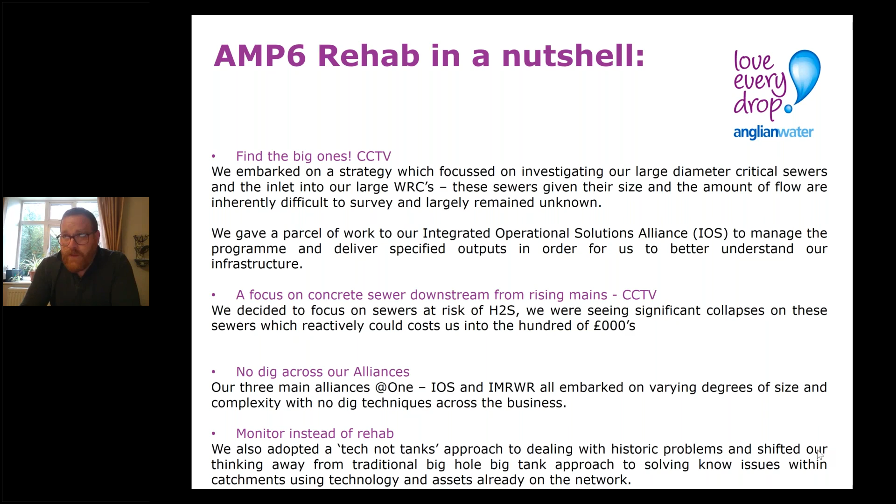The success of that program, the trunk sewer program, was really borne out when we got the first one that said, okay, we found a problem. The problem was found on our largest trunk sewer that goes into Whitlingham WRC, the treatment centre for all of Norwich. So it's the biggest one we have. This sewer happens to be 12 metres deep, about 1.7 metres in diameter, an old brick sewer.

This is what we found, and I think it might take a while to jump on, but this is it: where those bricks should be, they no longer were, and that's a real problem.

I've called this one very deliberately 'avoiding a disaster,' because that's ultimately what this was. Had this inlet sewer collapsed, it would have been catastrophic, both in terms of environmental impact and the impact on almost every aspect of PR or finance or anything you can think of that you wouldn't want thrown at you in the water industry. This is one of those sewers where you just don't want anything to ever happen, and there are obviously those across the region and across the country.

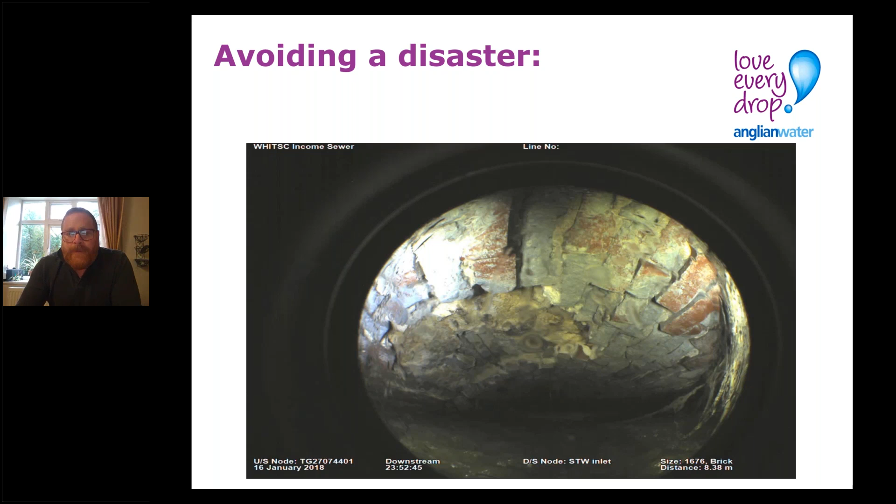I'll come on to how we got this photograph, but essentially this is what it looked like when we'd stopped the flows going through. You can see that the top half, or the crown of that pipe, is just earth essentially. There are a few bricks in there, but that could have collapsed at any point in time. So to get us to a place where we could actually do that, we had to come up with something really innovative.

We engaged with our supply chain and came up with an over-pumping solution, which at peak had to pump 2,000 litres of sewage a second. I was told this was the largest over-pumping of sewage in Europe at the time, and there's no doubt there are people on the calls who'd say 'I doubt it, because we were doing something better' - but that was the story I was sold anyway.

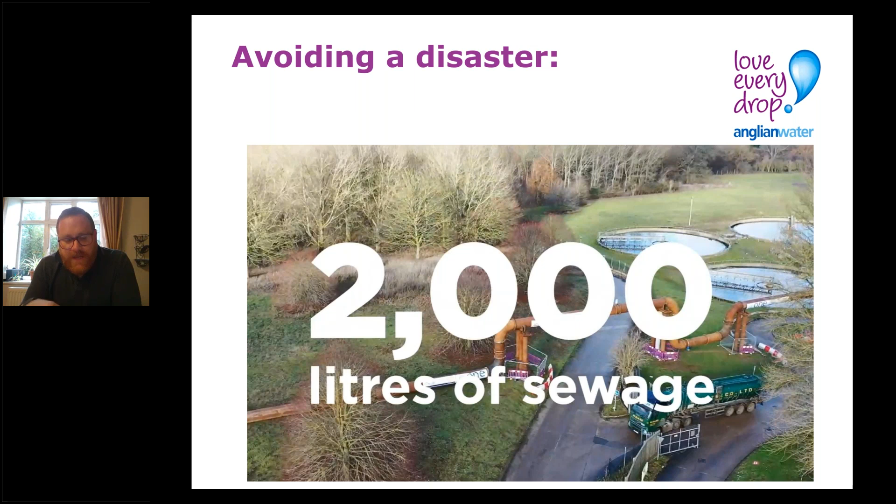So the work and the thought and everything that goes into getting something like this up and running was utterly phenomenal. Essentially we removed all of the flow from that system, and here's another example of what that looked like. It was just a real sight to behold, something which we've never done of that scale before.

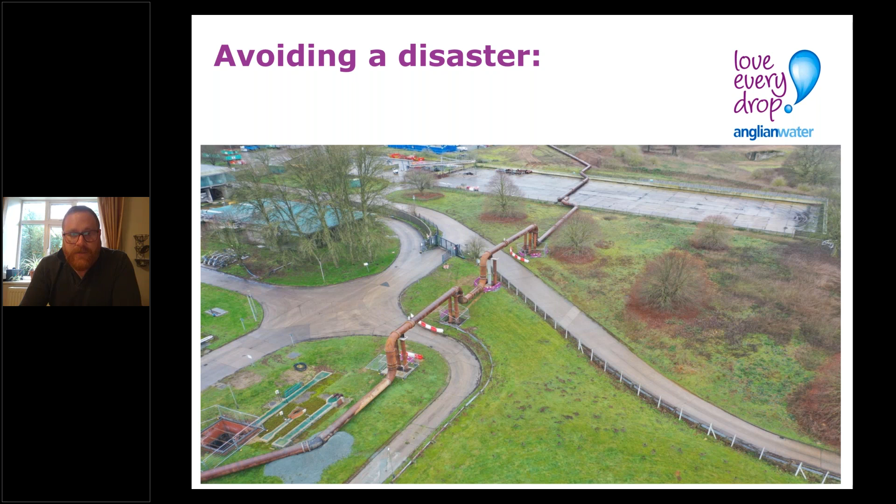Hopefully this is ticking round for you, but I don't want to labour on the point. If there's any questions or anybody wants any information on who did what here or how we did it, I'm happy to pick them up in the questions or later on, but I shall move on.

The technique we used to replace this was obviously, you know, the cost of digging down 12 meters and relaying this was just a no-brainer. So we spent an awful lot of time coming up with a solution, and this was it. Without going into detail again, this was the solution which we came up with to avoid the dig down and replacement of a massive sewer.

I'll come on to what it looks like now. This is a photograph of when they'd finished the work, and given where we'd started with the first picture, this was just utopia for me, going from ensuring that the resilience of that network is now in place for what I've been told is and should be 100 years. That's a really good feeling, because I now know that the rest of that system is relatively intact and is actually going to continue to serve Norwich as it should.

And now the piece that was wrong, we didn't wait for that to collapse. We avoided that disaster, and it cost an awful lot of money to do this, but it is, for me, the best project I've ever been involved with - something where you can say you took it from the concept of going to find out if something was wrong to actually resolving that issue. It was a great journey, and one which we've carried on with.

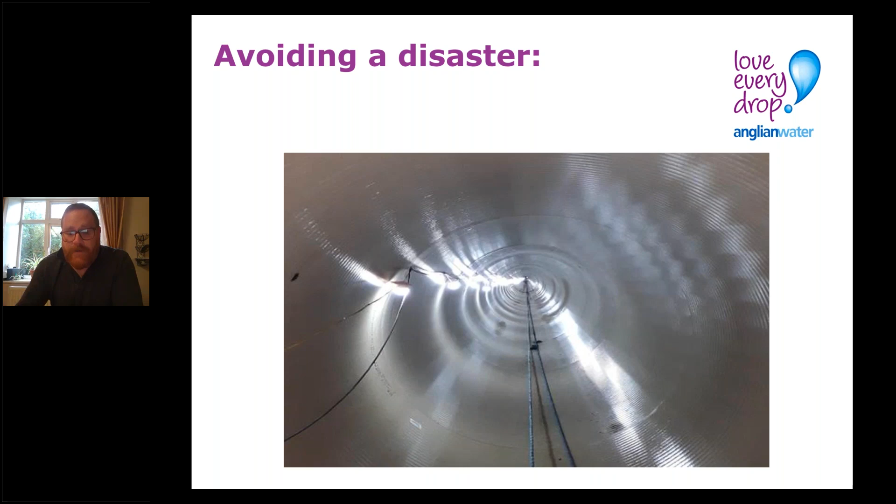So just to stick to the brief agenda that I've got, it was something around the COVID response. If I was to think about our COVID response purely in terms of sewer rehab, it would almost be - and I'll probably get told off for saying this - it sort of happened at the right time, purely because we'd finished the work for AMP6 and we were in the planning phase for year one.

So the one scheme which we have on site and going, I'll come on to in a sec. From a purely sewer rehab perspective, the impact from COVID wasn't quite as painful as it was felt in other parts of the country or other parts of the business or other areas.

Having said that, rather than focusing on the negative, because obviously you've all got your own eyes and you're all experiencing this yourself, I probably wouldn't be doing this seminar today. I'd probably be walking around no dig in Peterborough with all of you, and it wouldn't have given the platform that we have like we have now.

And you know, if you think about carbon footprint and all of that stuff, the travel has all been avoided. I don't know where you're all sitting, but I'm guessing that some of you, like me, will be either in your kitchens or in your lounges, and the whole ability for us now to communicate and work in a different way really does open up opportunities.

That's something which I'm really keen to talk about, because I have a real passion for taking what we do wider - both in terms of what Anglian does out to the rest of the industry, in terms of the sewer rehab network groups and the innovation labs, but also bringing the brilliant stuff that some of you guys are doing and offering it back into Anglian. Because for me, there's been almost a legacy in the water industry up until a point, within the last few years, of 'we can do this ourselves, we're really, really good' - and I completely agree with that. All of the companies that I've worked with are really, really good, but actually we cannot do it on our own, and that for me is one of the most important things that we all do.

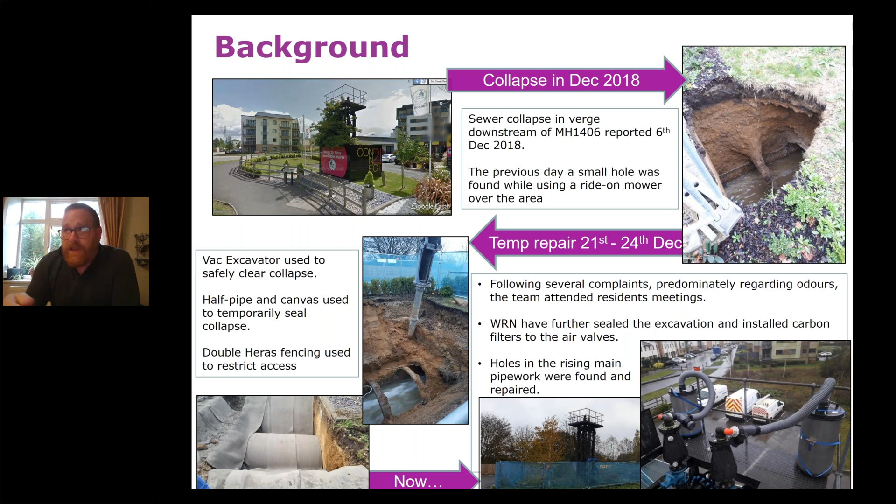It was in such a poor state that we had to do a temporary repair while we worked out a solution. Whilst this was going on, we were still in the throes of doing the Whitlingham scheme, which gave us traction to start pushing this stuff wider and really getting involved with sewer rehab work we'd not really done before, spending money we'd not really had to spend before because the assets had been fine. But as with all of this, they come to the end of their life, and it was an eye-opener. So if you think about what happened at Whitlingham, the finding of it, then the warning shot here and where we're going with this - it's a great story to play out, which is why I wanted to do this today.

In terms of the strategy for Peterborough as a whole, we can't afford to do everything. As all of you will be aware, you have a finite amount of money and resource, and you have to spread that across the region and mitigate those risks and do what you can. Something we found not surprising was there was a significant amount of H2S attack in the network.

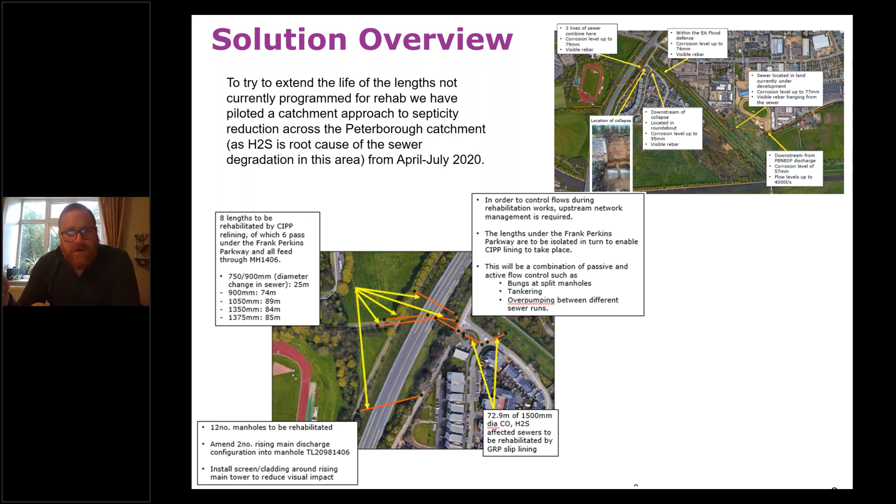I'm conscious I'm really running out of time. This talks about where we would need to put some of the over-pumping and how we would possibly manage to do that. It was a real challenge, and one that @ONE, our largest alliance partner, have completely blown us away with the solution they've done. Whitlingham was a really tough job, but thankfully for us it was on our land in the middle of a field. This one is in the middle of a city centre.

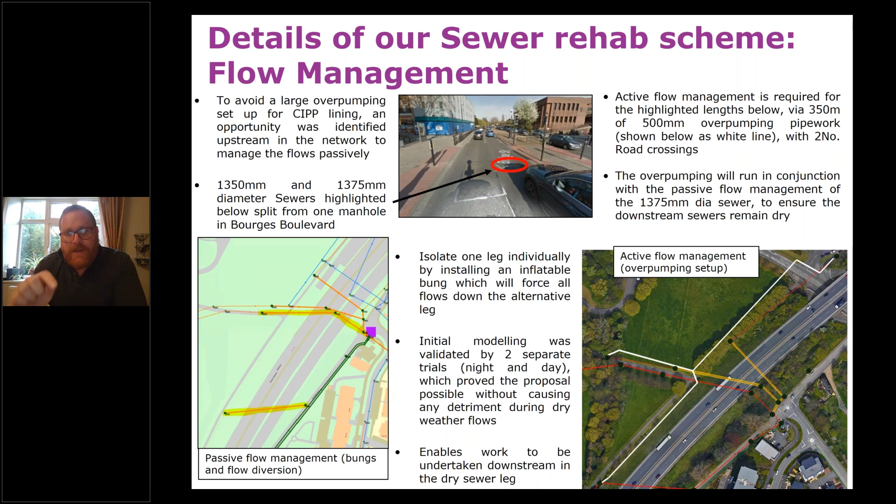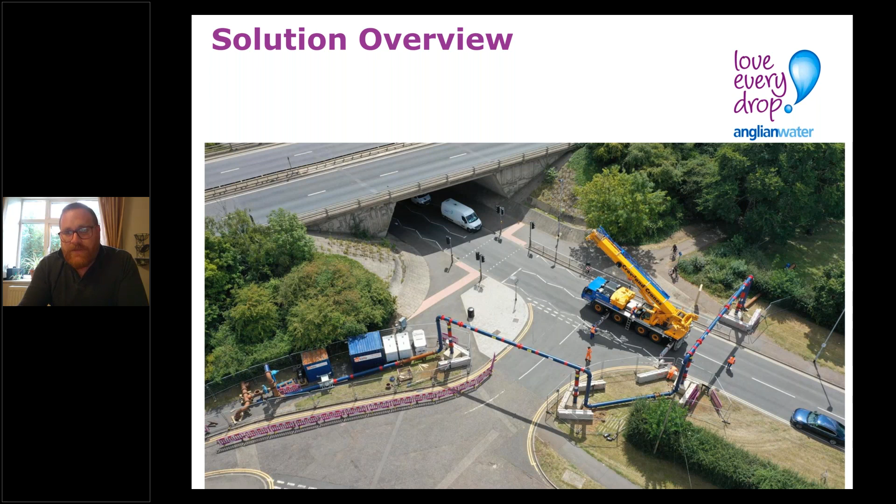So the over pumping which you saw at Whitlingham, we engaged with the same supply chain, and they've done it. This is probably what you would have seen on your way in this morning to No Dig Live, where we are doing this live over pumping in a town centre, and at this scale. We've done it at Broadhome, and now here, and it's revolutionary for us. I don't know whether some people are already doing this stuff, but for us it was like, wow, we can really do this. This drone footage gives everybody a completely different perspective of just how magnificent some of this stuff is. We're working live here, with live flows on some of these sections, and for us it's groundbreaking and a complete game changer.

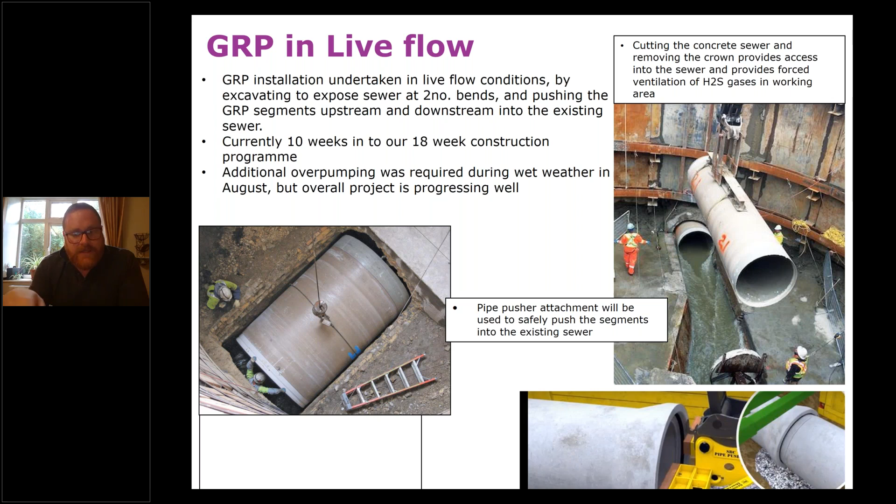As much as we've got this now nailed, and I'll probably get told off for saying that, because we probably haven't, but we're 95% there I would say. We need more of this type of innovation and no dig solution across the whole network.

So that leads me on to these innovative solutions. I've got 1 minute, I need to be really quick. So this is Rob, take a moment. You can have a couple more minutes.

Thank you. So the innovative idea, we came up with a rain garden idea, which I think was actually originally developed in Welsh Water. My memory is a bit hazy with this, but it was about trying to do things differently, keeping the surface water here rather than pumping it through a network. That comes from having those different conversations, the networks of people, the Water Innovation Network, and the collaboration.

Finally, this is our proposed scheme, alongside maintaining some of the stuff we did in AMP6. It's now about the AMP7 scheme. We have to live within our final determination, which, as you're all aware, we've taken to the CMA. So without labouring that point, we still have to focus on those sewers that are of critical importance to us. For this AMP, we're focusing on road, rail and rivers - all of those sewers that flow under, some of which we're aware of and some we haven't been. That's the focus.

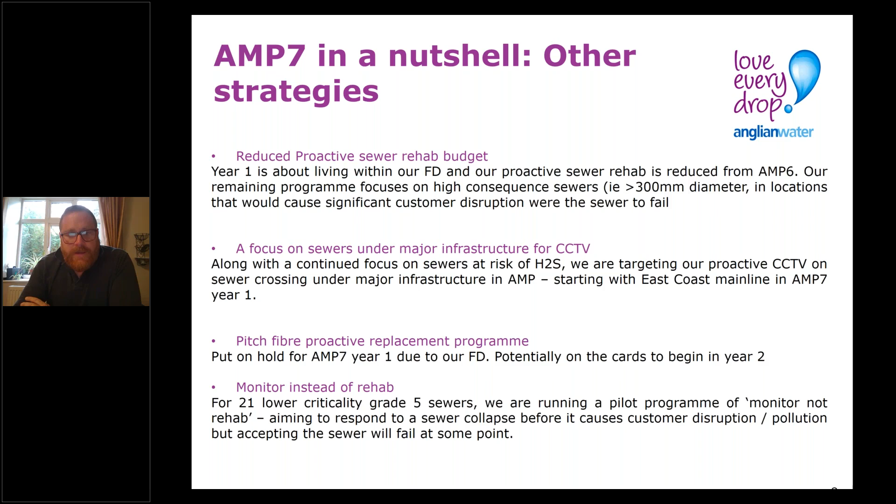There's a further CCTV campaign around H2S, there's a pitch fibre proactive programme, and there's the monitor instead of rehab approach, which, like I said about Peterborough Potter's Way, we can't afford to do everything, but we can afford to monitor everything that we feel is at risk. So rather than waiting for somebody to tell us something's gone wrong, we are being told. That's a huge leap forward for us in terms of being aware of our network and having a smart network. With 21 minutes gone, that takes me on to any questions.

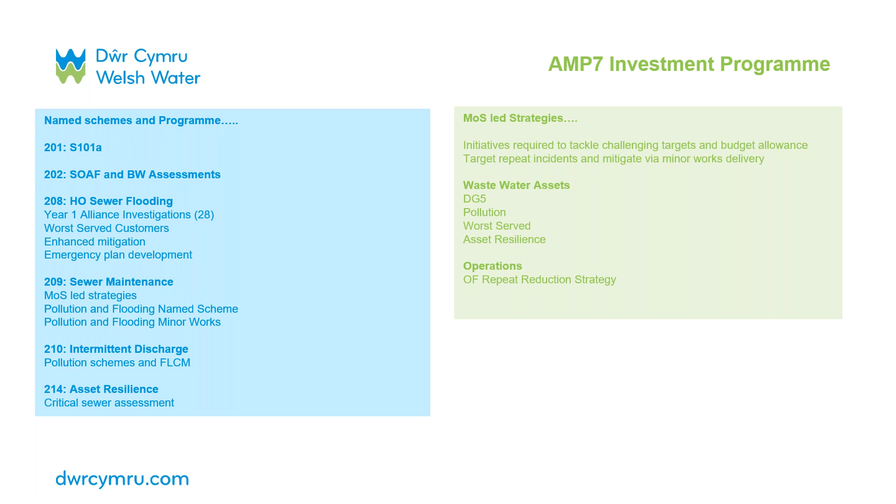The purpose behind the MOS-led strategies is to tackle challenging targets and budget allowance, target repeat incidents, and mitigate via minor works delivery. This covers MOSs such as DG5, internal flooding, pollution, worst served customers, and asset resilience.

A key focus area is around efficient delivery to ensure that the right people and expertise are available to get the best value for money. This has been split into four areas: wastewater assets, the Alliance, our engineering delivery team, and operations.

With wastewater assets, we're looking to increase our function for minor works delivery, focusing on low value schemes but delivering high outputs, and ensuring a thorough and definitive root cause analysis prior to scheme feasibility release. We'll also look to utilize innovative technologies to confirm RCA, including technologies such as electroscan.

Moving on to Alliance delivery, we're looking to batch schemes and investigations where possible for efficiency, promote collaboration and innovation, and there's a big focus on risk and value sessions to ensure the correct investment is progressed, along with discussions around the acceptable level of risk to take forward.

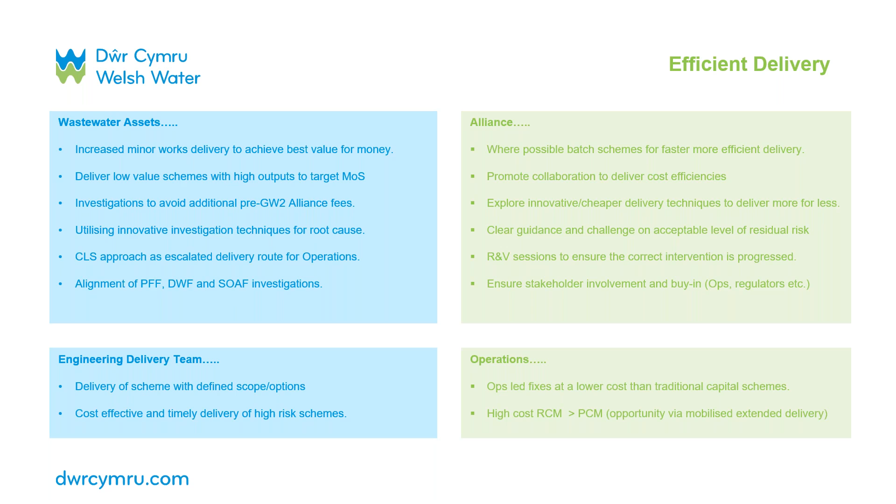In terms of the engineering delivery team, we look to utilize this team to deliver defined scopes of work, which are usually high priority, high risk schemes, moving into more of an ops-led type approach for fixes at lower cost compared to traditional schemes.

In terms of the AMP7 MOS strategies, these have been developed to target known problem areas proactively and look at low cost resolution, focusing mainly on flooding and pollution reduction through register reviews and repeat incidents, along with 12 monthly follow-on reviews where we assess and resolve any residual risk. We're also focusing on proactive tools, examples being the rising main triangle for burst prioritization and understanding of business risk, and heat maps for other cause flooding and pollution hotspots, which we can use to develop proactive survey programs.

We're also looking at worst served customers. This is a new measure covering customers at risk of repeat internal flooding within a 10-year period. Tasks for this include register reviews and audits to confirm customers at risk, and also removing them from the registers through minor work schemes to tackle OC issues. The aim here is to remove all worst served customers aligned to our 2050 vision.

And finally, looking at asset resilience, where we are identifying and surveying critical assets to inform of condition and future investment need.

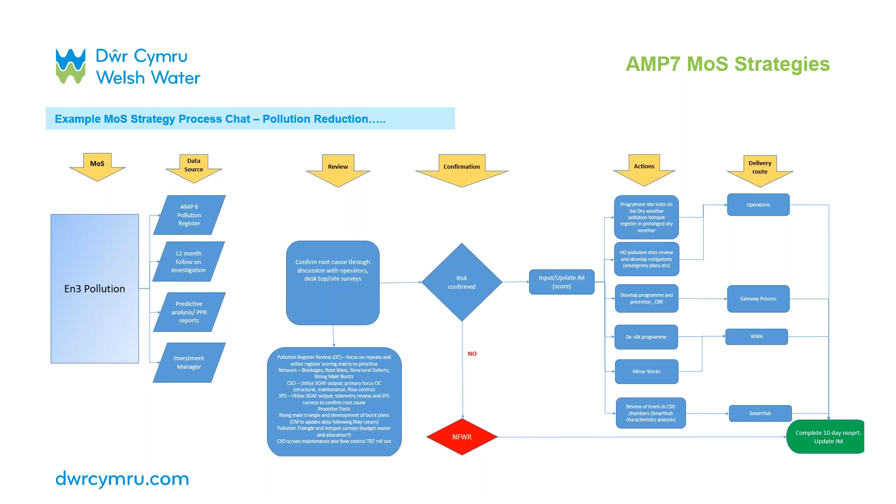The next slide gives a brief overview of one of our flow charts, which shows in this particular instance, relating to the pollution strategy. I appreciate this is quite small, but I'm sure you'll be able to look at it in more detail when the presentation has been circulated.

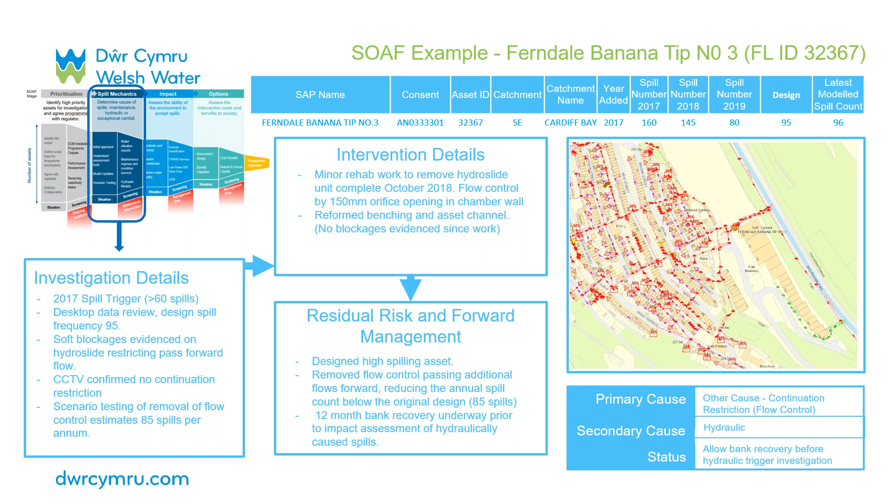This slide shows an example of a SOAF delivered scheme through wastewater assets, which involves site investigations, telemetry review, and scenario testing to inform the hydro slide removal. This had a very positive result, showing a reduction in spill frequency from 160 to 80 spills. This was a positive example showing that through in-house investigation and understanding, we can deliver positive results through minor works delivery, getting small value schemes to deliver high output results.

As mentioned previously, a focus is towards proactive investment and investigation. Evidence shows we need to be more proactive and use data to target low cost, high output investment. This includes trend analysis regarding root cause and targeting known repeat issues and OC problems.

This also feeds into the proactive initiatives mentioned earlier in the presentation to target areas of poor performance and proactively investigate to inform future investigation. Some examples here, mentioned previously, are other cause flooding heat maps, pollution triangles, and rising main burst triangle.

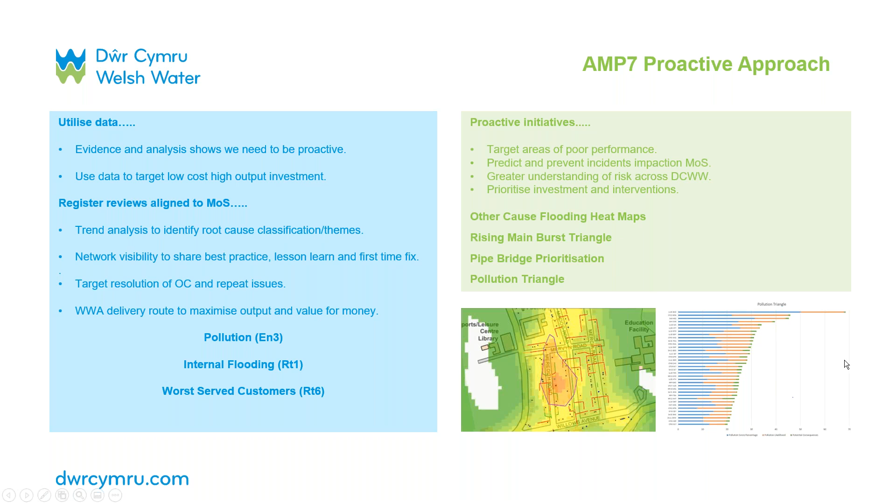In AMP7, we need to look to be more proactive and collaborate with all stakeholders to get best value for money and achieve our targets through this linked up approach. This includes improved visibility to ensure long-term buy-in and sustainable management of the SMNR type approaches.

Some examples of this have been rainscape initiatives, working with local authorities, and involvement in our flood alleviation schemes, which are joined up with local councils and the regulator.

Next slide is regarding risk management to inform in-AMP and future expenditure. It's very important to have that accurate risk position, supporting our RCA root cause analysis documentation, to inform both in-AMP and future spend. A big push is on definitive root cause prior to release of any scheme, ensuring we've got the correct root cause and are focusing on the right options to push forward.

We need to also utilize existing information, such as sustainable drainage plans and outputs from other initiatives like SOAF, to feed into these programs. We also need to push more on the delivery of minor works programs, so we get best value output to achieve our MOS for low value scheme delivery.

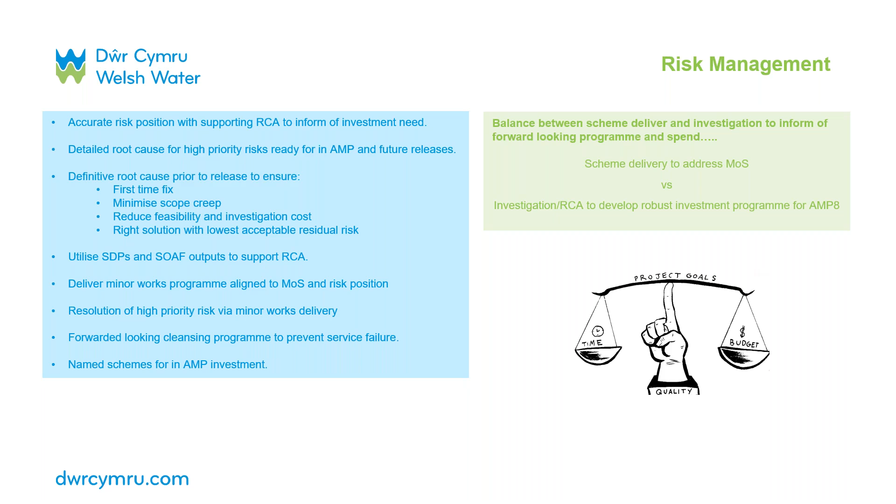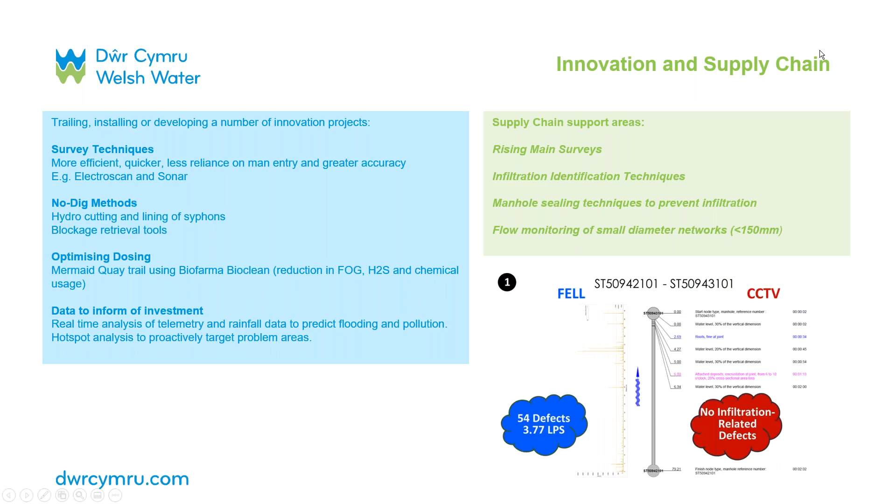Moving on to some of the challenges we're facing now and for the future, looking at PR24. Some of the challenges include changing customer expectations, changes due to urban creep, greater inflows into our networks, climate change, and an aging asset infrastructure.

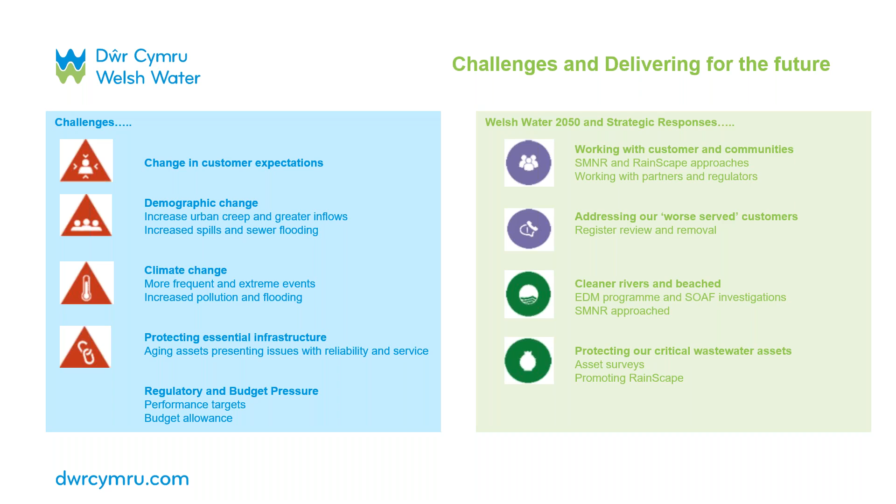What we try to do is align this to Welsh Water's 2050 strategy and strategic responses - working with our customers and communities, looking at SMNR type approaches and RainScape initiatives, working with our partners, addressing our worst served customers, cleaner rivers and beaches through our EDM program and SOAF investigations, and protecting our critical assets through surveys this AMP to determine structural condition and inform future investment and spend requirements.

So a quick summary in terms of preparing for PR24. Looking at lessons learned from previous AMPs, we need to provide more evidence to develop performance commitments and justify investment. Ensure our investment management system reflects catchment position accurately, and try to get ops buy-in and awareness early on with these name schemes.

To develop a robust AMP8 investment program, we want to engage with asset strategy early on to build a bottom-up investment program, provide name schemes with definitive root cause and option cost to inform investment requirements, to give a more accurate plan.

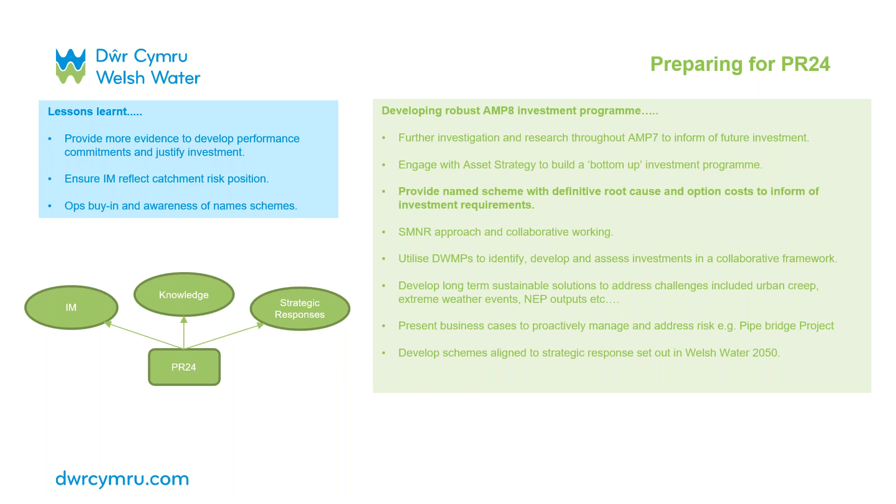Utilize existing data and also build on the findings from drainage and wastewater management plans, which will be ongoing throughout this AMP and will feed into the PR24 program. Also develop long-term sustainable solutions to address challenges such as increased urban creep, extreme weather events, etc. And continue to build on these journey plans, set out in our Welsh Water 2050 strategy.

Just to summarise, in terms of AMP7, the programme has been aligned to our 2050 vision and long-term aspirations, which leads into the development of our journey plans. It's a risk-based AMP7 programme.

Evidence analysis shows that we need to be more proactive, looking at proactive initiatives, MOS strategies to target low-cost, high-output investment, focusing on OC issues and repeats. We need to utilise minor works delivery and also wastewater assets teams and operational delivery for high output to meet our targets, but for low cost solutions.

In terms of relationships, build on the collaboration we have in previous AMPs in this AMP. Further engagement is required, building on the collaboration and those sustainable management type approaches.

Finally, looking at AMP8 and PR24, developing this catchment type approach, ensuring we have defined RCA and name schemes, and ensure we have engagement with all stakeholders, including asset strategy and our regulators early doors, to inform our PR24 program.

Thank you, and yeah, any questions I'll be happy to pick up and get back to you. Thank you.

So maybe to preface this, perhaps there's never been a greater need for the phrase risk management in the public sphere than right now, and perhaps there's never been a time where risk management has been more relevant to sewer rehab projects. It doesn't have to be a complicated thing. Just a constant awareness of what is going on in our organisations and the external influences that may affect our rehab projects or our organisation's business.

So risk management is arguably the most important thing. So maybe just skip back a slide and we'll look at just what we are doing on the island of Ireland at the moment. Embracing current scientific thinking, water utilities are tasked with delivering technical excellence in spite of increasing financial, social and environmental risks.

That much is clear and has been clear from presentations already. Irish Water are under the same pressure to use tighter capital resources to maintain a rather large sewerage asset base. So the challenge is we can't fix everything, but using risk-based principles, where do we do our sewer rehab, and where do we leave as is until funds become available at a later time?

So on screen, you can see, hopefully, just a couple of photographs of some of the rehab that has been undertaken across the island of Ireland.

And during 2020, unplanned, reactive, proactive, if you want to call it, rehab works have not ceased. But certainly this year, for most part of this year, has certainly provided space to focus efforts on asset planning activity - that activity which seeks to continually improve risk-based decision making.

How can we make decisions on potential rehab projects if the data is false or misleading? And that point is very important in all of this, because the more we know about our assets, the better decision making can be, and we can direct scarce and precious funding to the right projects.

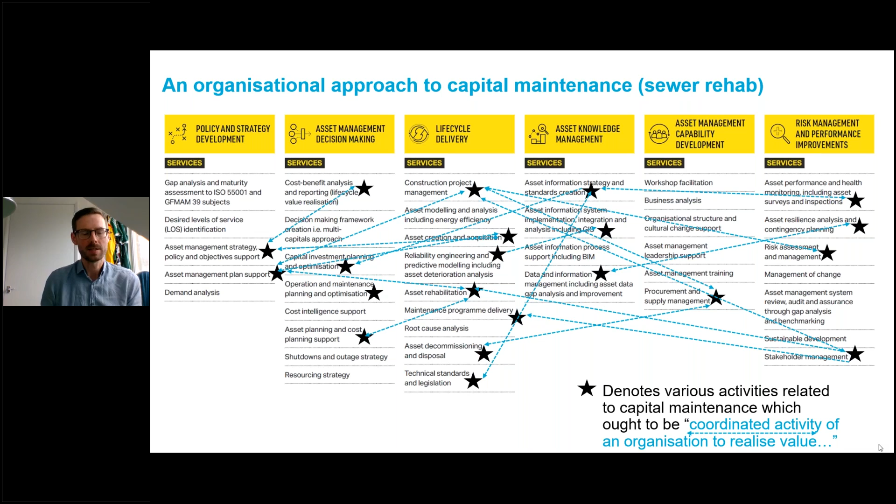So this diagram is entirely fictional, but it ties risks back to organisational value. You should see that every risk which we address within our sewer rehab programmes and projects should address an organisational risk. If it doesn't address an organisational risk, why do we do our sewer rehab programmes in the first place? So this is entirely fictional, as I've mentioned, but think about a risk register you know, or that you've come across in its myriad of forms.

If there is a risk of an operational asset failure, an organisation will initiate planned or unplanned maintenance programmes, and these will typically be delivered by an organisation's service providers as work orders to address that risk. So tie the risks back to the organisational objectives. Mentioning COVID-19, at the moment it has played havoc with many organisations' asset delivery targets.

Resilience analysis and contingency planning is something we have to consider in all of this, so that risk can be addressed in a way that suits the organisation's overall objectives. So as I mentioned at the start, maybe that means scaling back on asset delivery work and putting more emphasis, using the space and time created, to do more in the asset planning space.

Asset data gaps or inaccuracies can lead to poor decision making. As a sewer rehab team we collect thousands, tens of thousands, maybe hundreds of thousands of pieces of data that update an organisation's Irish Water systems, and we have to get good quality data in there to make good quality decisions. So the minutiae of detail is very important to the overall organisation's objectives, and it's important for us to remember that.

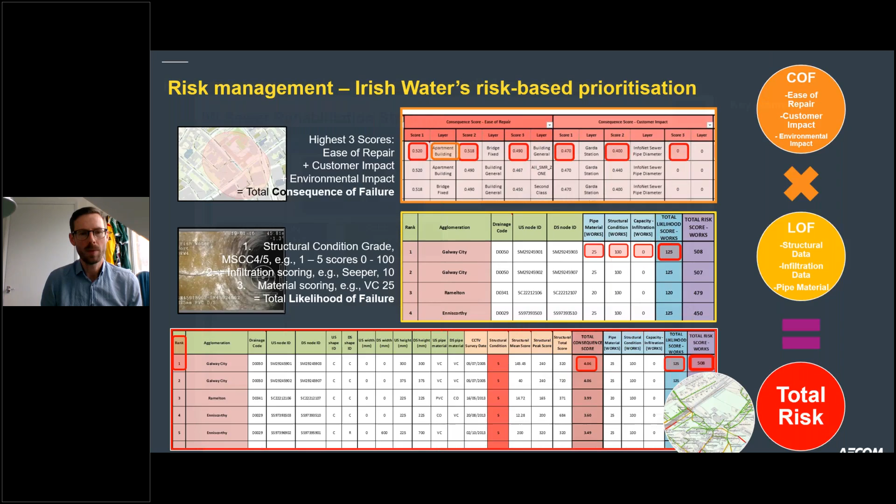Moving on, just to mention our proactive workflow strategy. When we talk about risk, maybe it's fair to say that we, the people working on sewer rehab projects, are human after all. We're not perfect, but we perhaps present the most inherent risk if we don't follow well-established procedures. So it's important to agree a workflow strategy that works for all stakeholders - again, there's no perfect solution.

Irish Water's rehab strategy has a well-established process of gathering data from legacy local authorities, inspection planning by asset planning, followed by condition assessment by asset delivery, often undertaken by external contractors. Following that condition assessment, data is fed into the prioritization tool and a selection process is used to determine rehab works. Budget considerations are made using the sewer rehab assessment tool, followed by detailed design and delivery.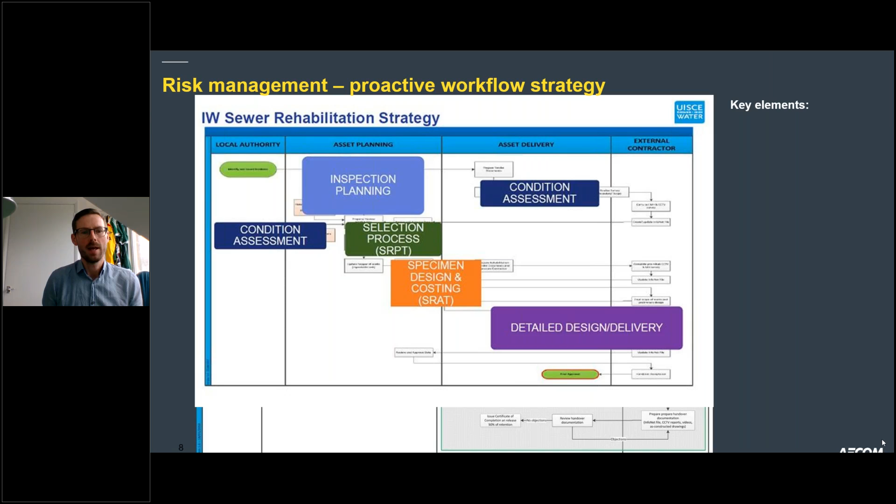In summary, there are some key learning points in all of this. If we analyze the entirety of the strategy, there are three key learning points: enshrining stakeholder responsibilities - you can see the four different stakeholders across the top; following workflow processes from inception to delivery of sewer rehab, and following those to the letter; and thirdly, recognizing the large number of interactions required throughout the processes.

There will always be planned and unplanned reactive maintenance required outside of established procedures, but these still follow similar steps for review and verification.

We do risk management every day of our lives. Hopefully this topic hasn't been any more complicated than it needs to be. It is arguably one of the most important topics we need to look at right now.

A useful way for us to view what's going on the island of Ireland is to look at a prominent sewer collapse in the centre of Dublin, the Goldenbridge 9C sewer rehab project. I'm going to spend just a few minutes on that now, and I think Cathal is going to talk about that. Before I go, thank you, and just to let you know there are other ways you can engage with Irish Water and their service providers, not least the Story of Water, which aired on national television a few months ago. So with that, I'll leave you and let Cathal take us briefly through some of the aspects of the Goldenbridge 9C project. Over to you, Cathal.

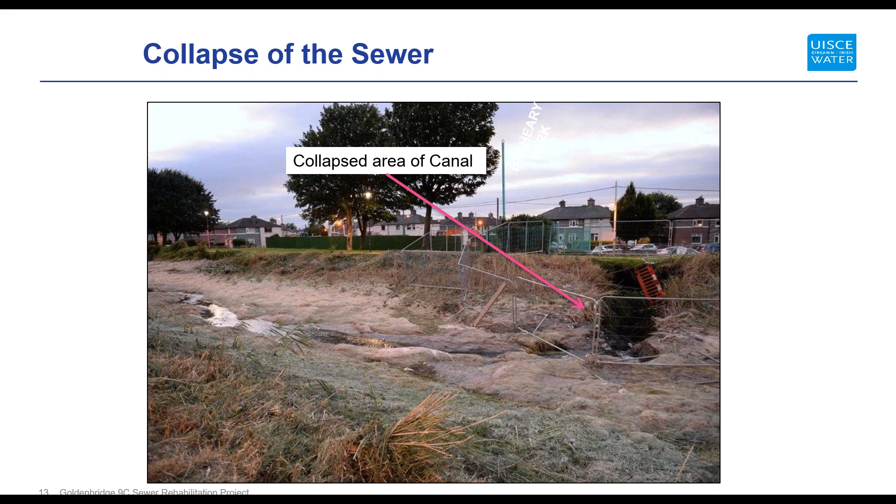The 9C is the main artery foul outfall from the whole of North County Dublin. It's an 1800 water main that runs all the way underneath the Phoenix Park in Dublin, under the River Liffey. It's a siphon foul main under pressure and comes out at Ringsend, a total of 20 odd kilometres. The collapse itself was noted generally back in the summer of 2019.

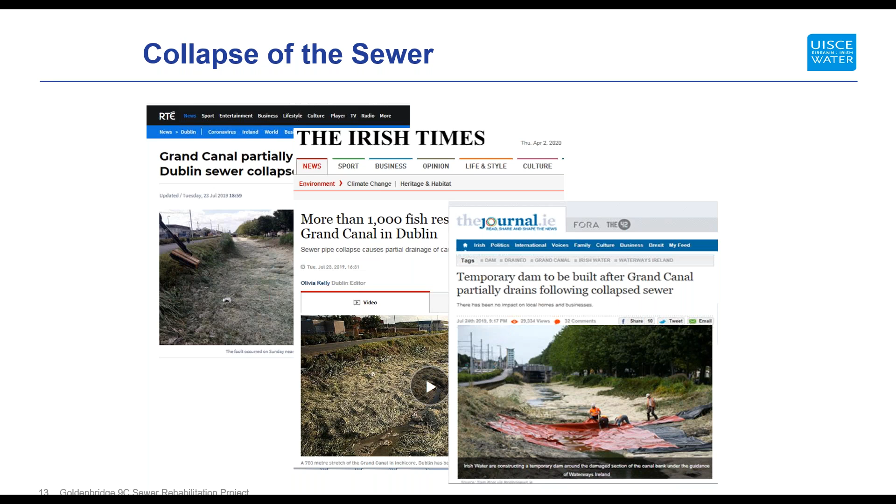The collapse occurred in a very significant environmental area at the Grand Canal, and it became headline news throughout the country due to the impact on the environment and due to the fact that it's very much a local amenity in Dublin for residents and people during work hours. It's also the main traverse to the southern Shannon in Ireland, for the barges all the way from Grand Canal Dock. It hit headlines in all the journals worldwide and in Ireland.

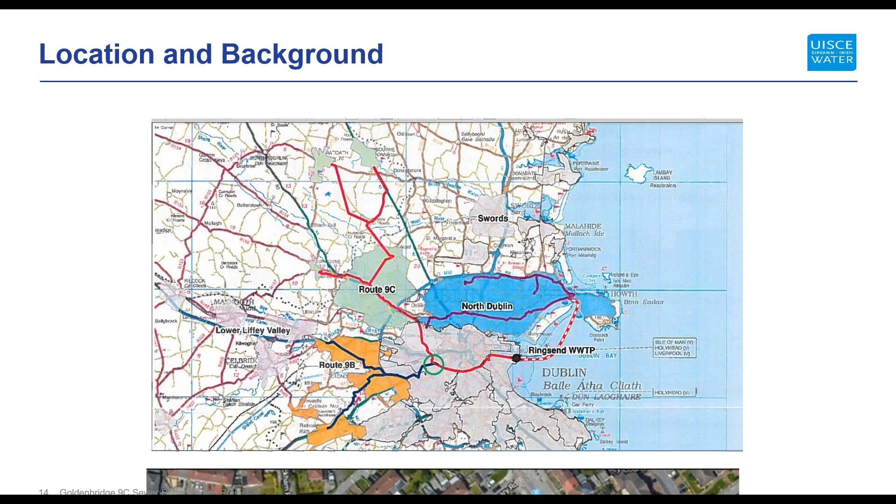GMC were engaged early on by Irish Water to give an idea of the possibilities for controlling and carrying out these works. There was no potential for us to shut this sewer off due to the constant flow and the catchment area. So it was decided that, apart from drilling or some ground-borne or trench technique, we go with a GRP system.

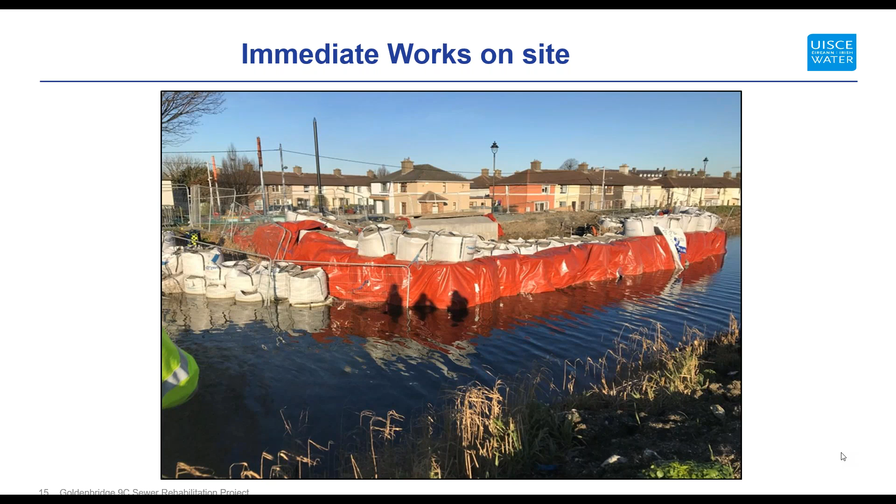You can see some of the initial sites and work there. Again, the first thing we had to do was try to secure the canal itself to stop any more influx of water. So, in association with Waterways Ireland, we started to build the dam immediately, to secure the collapse and prevent any further loss of water, while keeping any marine or canal water contained. You can see some of the pictures.

Complexities on site, lads, there were an awful lot of unknowns due to the fact there was a collapse. There were huge levels of H2S, hydrogen sulfide, which meant we couldn't access a live sewer with high flows during a period of around September to Christmas. Again, the weather — a lot of this sewer was working at 80 to 90% capacity, and there was also the risk of flooding from the canal or a surcharge.

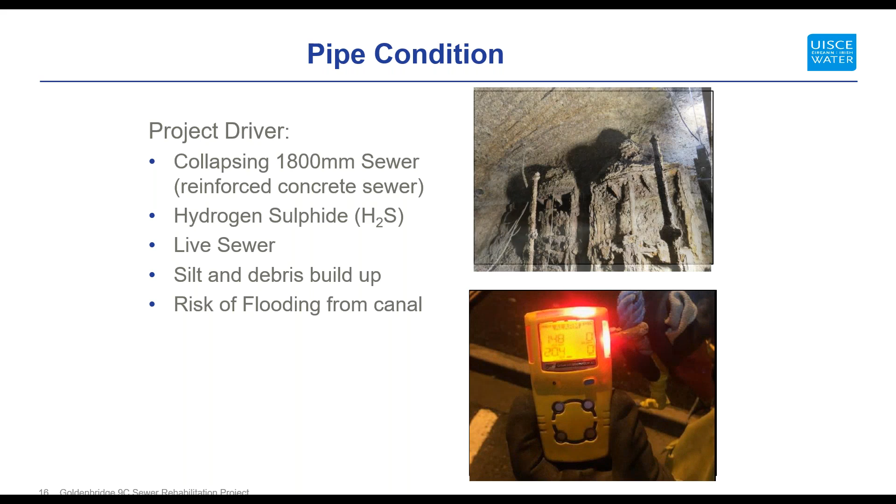We had to do an awful lot of trials, testing, camera work. Initially there was no man access at all, and you can see the level of H2S, that hydrogen sulfide, and its attacks on the infrastructure in the area.

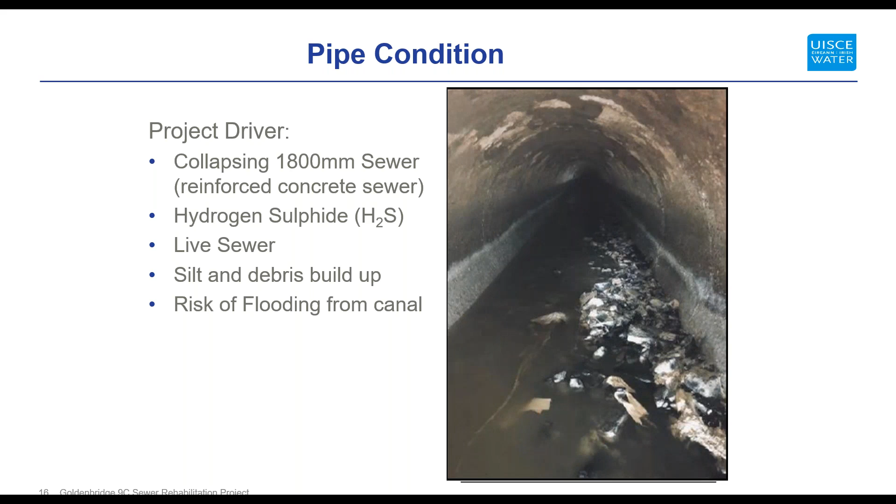GMC initially took on as much desktop study as possible, starting work on flow controls and modelling scenarios. We got in contact with the local authority, Dublin City Council, to start detailing what options we had for several flows further up the line or down the line, and what our action plan would be. It became very apparent very quickly that this was a job where the magnitude increased with regards to the flow.

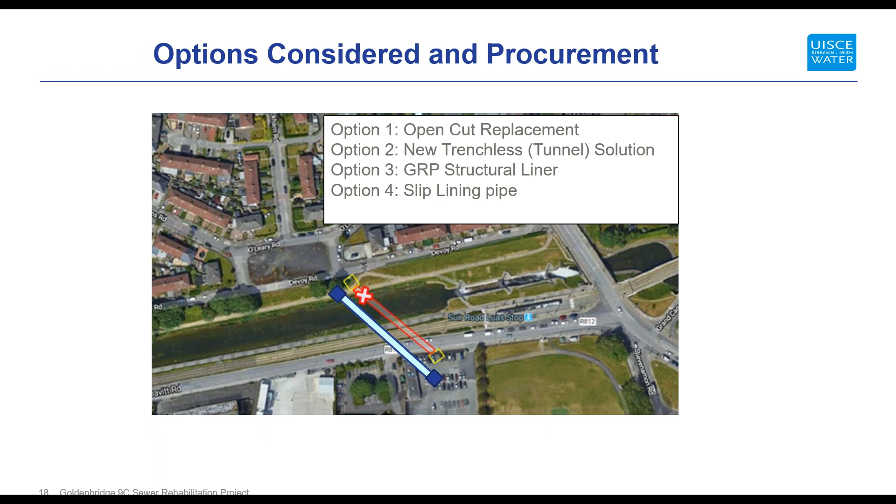So, in the end, we came up with the agreement that we're going to GRP line 75 meters in the area, due to the fact that trenching wasn't a solution because of a high pressure gas main, high pressure water main, and also the 9B. Also, what I haven't touched on is that the line actually runs under the light rail tram called the Luas here in Dublin.

The complexity of that is the canal was along the Luas, one of the main arteries in and around Dublin, so traffic levels were huge. Again, once we had agreed on the GRP, we went in and did a lot of surveying, non-invasive surveying and measuring.

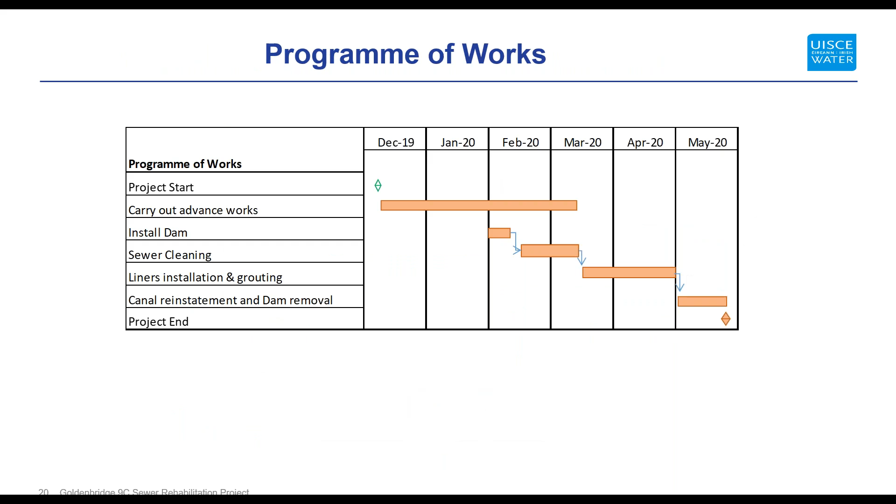We started detailing the effects of the liner we were going to use. Once we had that, our manufacturer, Channeline in the United Arab Emirates, got manufacturing. They pulled out all the stops on behalf of the client and ourselves to get this here early. Generally a 12-week turnaround for fabrication was done in 3 to 4 weeks, and the liners themselves were express shipped from the UAE.

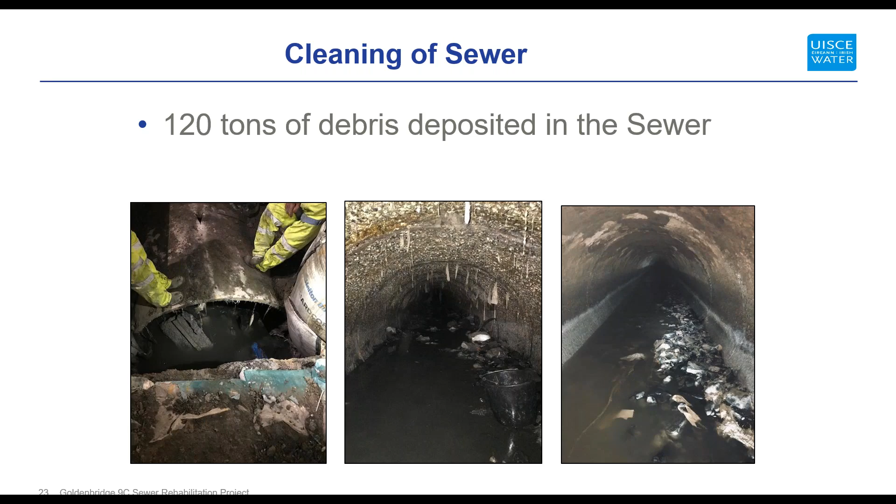Again, flow management - once we knew the liner was coming up, we totally dammed the canal. Fisheries were involved; we took any spawning fish and wildlife out of the area, and we went to work cleaning and preparing. Once the cleaning operations were done, we removed 120 tons of debris by hand via access shafts.

Once we had done a structural survey of the pipe itself and taken the load of it, we had a structural engineer do a non-invasive survey, and as you can see from some of the pictures coming up, we could actually see the internal steel, where the concrete had been totally eaten away.

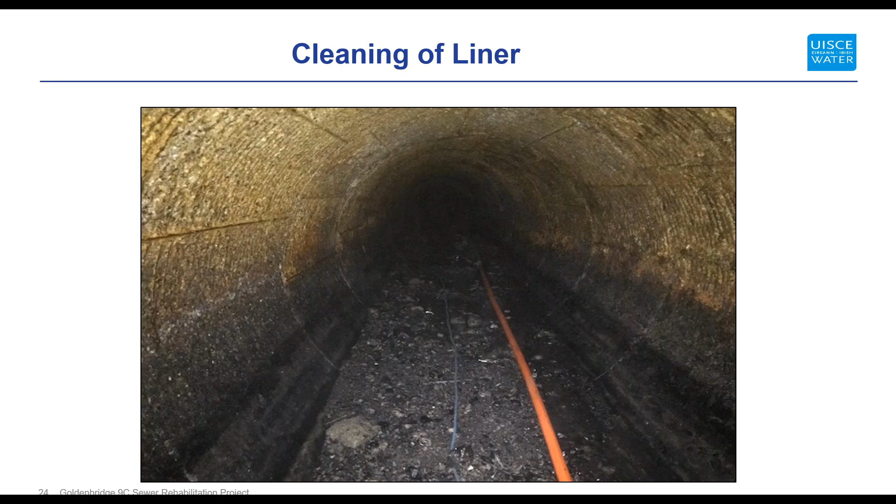We put in shields and protective measures for the workers while cleaning, and used a lot of non-invasive techniques - inverted heads, hand cleaning into safe locations - so we wouldn't carry out any more structural damage, especially under the area of the light rail. I suppose that went very well for us.

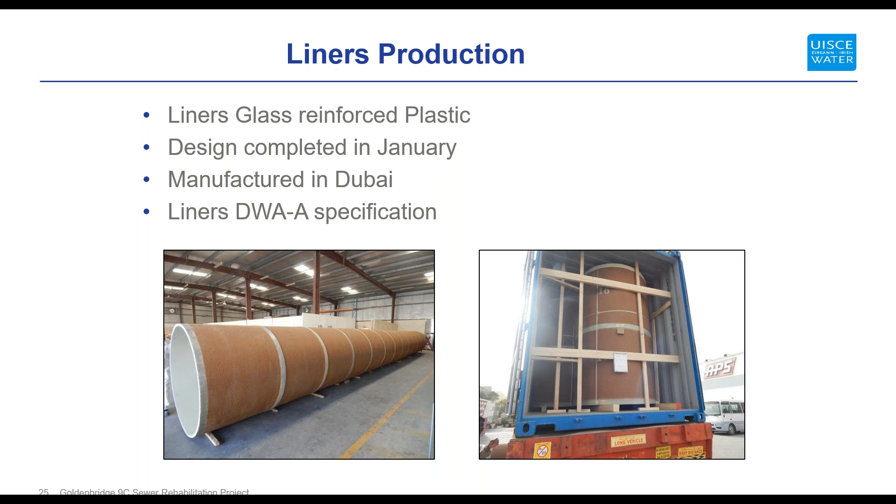Once we had that, we had the liners delivered from Dubai. The liners we've been using meet the DWA specification, away from the old WRC. The liners arrived and installation started in earnest.

On top of the liner installation, we got bad periods of heavy inclement weather, as we do in Ireland. That initially put us behind to mitigate risk to the lads. We took the option that under a certain level of rainfall, 48 hours beforehand, we would carry out no works, due to the issue of surcharging up the line. The canal at times takes uncharted connections from roads and similar sources, so the rainfall into the canal can increase.

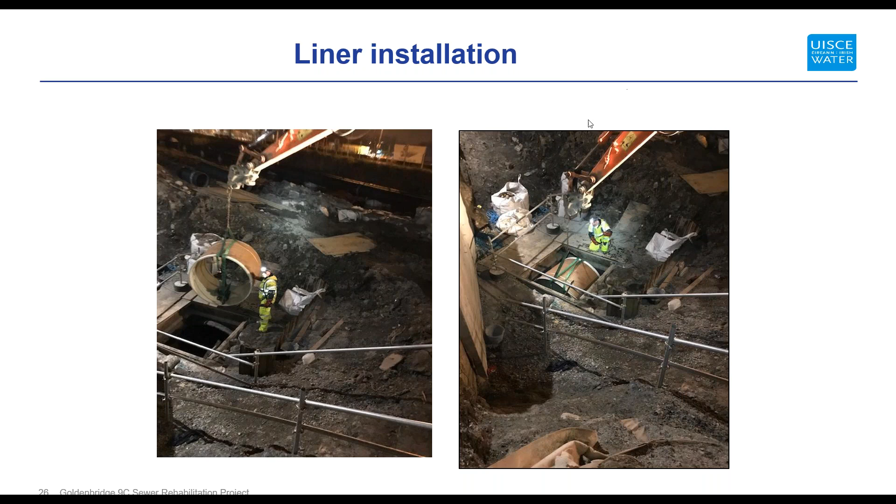As we progressed with the job, I think we installed 75 meters of liners over about 3 weeks. The grouting went very well. Part of the job was the total reinstatement of the canal, the dam, and the opening up. All in all, from the day we put the shovel in the ground on the 18th of December, we got out quickly in May, in time for what would generally be the tourist season for the barges.

We did all this, and to add to the complexity, COVID lockdown hit around St. Patrick's Day - just after the 17th of March was lockdown. We did discuss with Irish Water, and it was deemed an essential service due to the fact that flows had increased due to the number of people working from home, since generally a lot of this is residential.

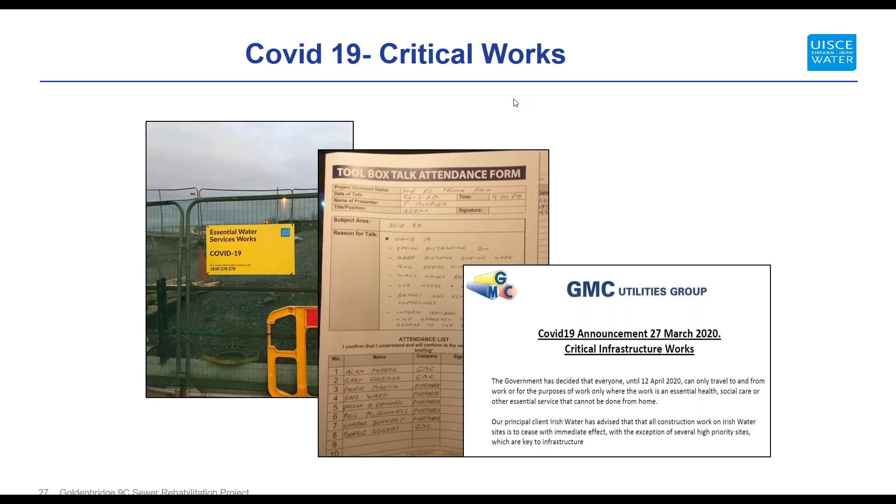We took on all the critical infrastructure works scenarios. We were probably one of the first people in Ireland to be on the ground during COVID. We worked with Irish Water and with the RE on this job to ensure we were applying all the early requirements from COVID - so not only working with the risks associated with the physical works, but COVID too, which was again a learning curve, and we had to implement a lot of measures.

The lining of the canal has gone very well. Today it is all in use.

It was particularly challenging to get the guys to understand that this was a very complex and very high-risk job. Our systems for safety, our systems for design - we went through it detail by detail, with a lot of long hours with Irish Water, the RE, Byrne Looby, and a lot of people came together at Waterways Ireland and DCC to make sure this would work, plus with the residential area beside us. All in all, a very successful job for everyone involved in the end.

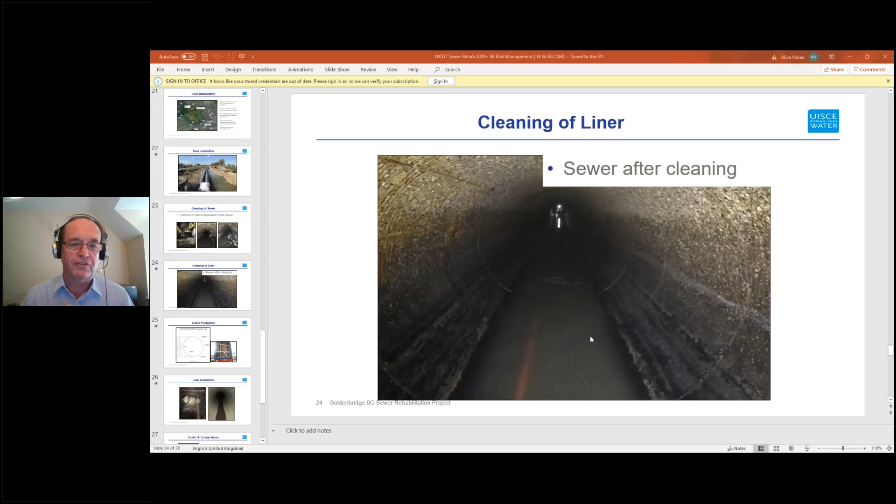So I've got a question here for the Irish Water team, if you can answer this one: on what grounds do you prefer the DWA specification, the German specification, over the SRM?

Well, shall I take that one, Cal? The specifications within the contract documentation, procurement and so on - at the moment it is up to the detail designer to decide which of the industry specifications he is to employ. So at the moment both are acceptable based on the criteria. This is, I suppose, where testing really becomes most important.

We want to be a group, and indeed we have pushed the boundaries on testing in recent days, where we're testing every liner, and we're finding that now 100% of the liners are passing, regardless of the original specification, the design criteria used. So probably that in effect is testament to the fact that the detailed design criteria, the specifications out there, whilst again they're not perfect, do satisfy the requirement for a good quality liner.

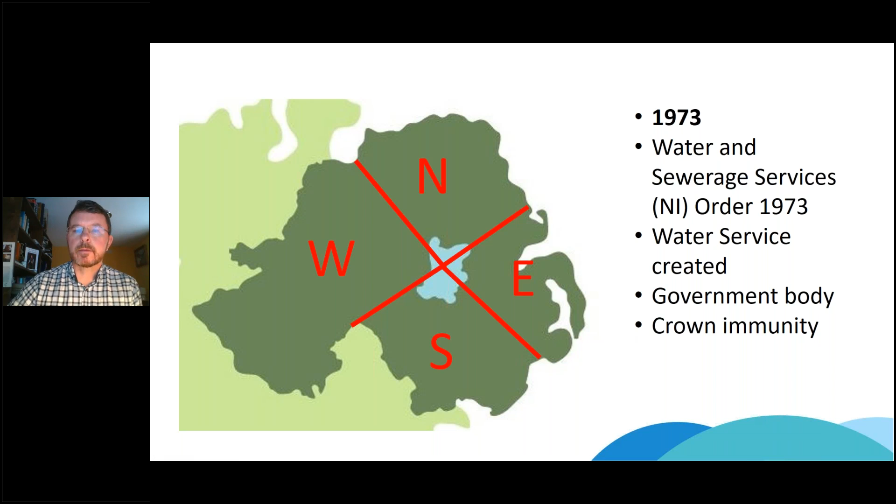Water Service was a government body, and for many years, up until 2007, it enjoyed a lot of Crown immunity from prosecution, for example, for pollution and environmental infractions. Again, there was a major change for us in 2007.

The Water and Sewerage Services NI Order 2006 was passed by our Legislative Assembly, and Northern Ireland Water Limited was formed. It's an agency or non-departmental government body, a government-owned company with one single shareholder, the Department for Infrastructure. Probably one of the biggest changes for us was that we came under a lot more regulation, environmental regulation, and also the utility regulator. The utility regulator in Northern Ireland is a bit different compared to other areas, in that it also covers electricity and gas as well as water.

So we lost our Crown immunity, and we found ourselves open to the regulator for pollution incidents, etc. That was a big change for us in 2007.

Moving along then, common to all water and sewage companies, we've got ageing networks, both in water and wastewater. Types of sewers: brick, clay, concrete, asbestos cement, PVC, pitch fibre, the whole gambit. And we've undergone...

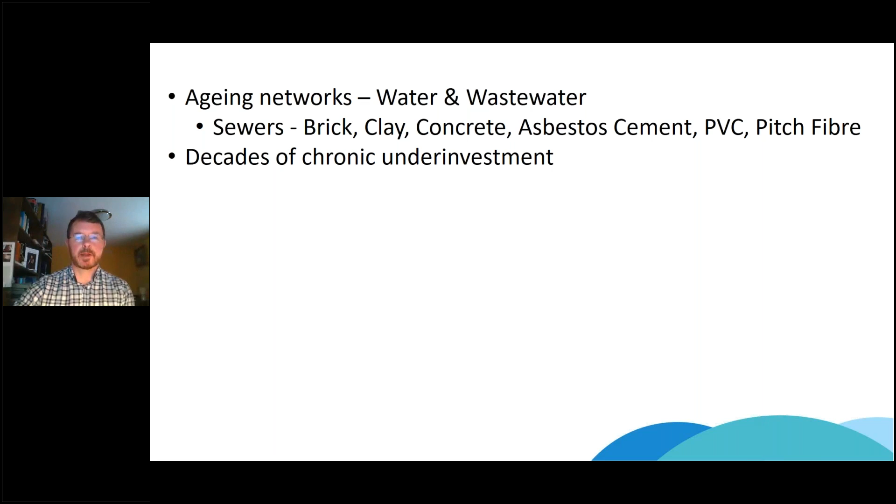Decades of chronic underinvestment. We're largely publicly funded, so a lot of our money to run the company comes from government subsidy, and we're competing with funding from the likes of education, healthcare, transport, social welfare, and also security, and all the rest.

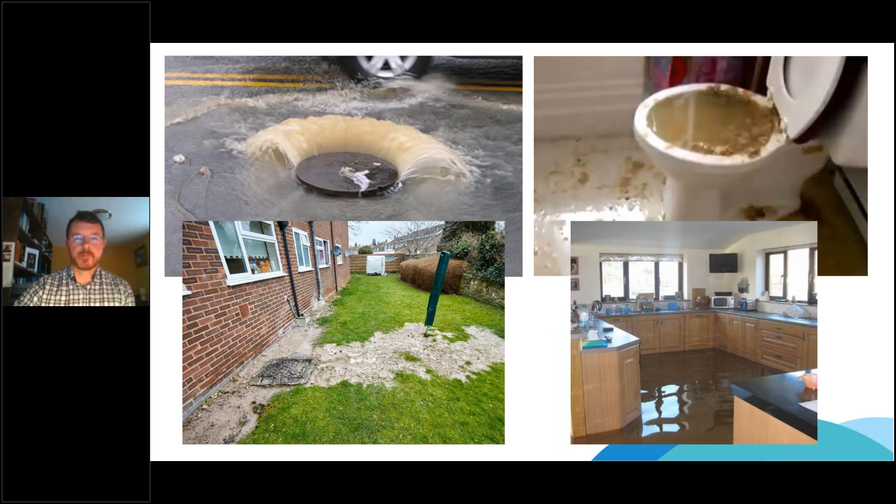So decades of underfunding has led to the age-old problems of sewers in poor condition, water mains in poor condition, bursting, etc. In terms of sewers, lots of problems with out of sewer flooding, internal flooding, etc. All the usual stuff that water companies would be used to working with.

Talking about the funding, Northern Ireland Water has a very unique funding model. We're the only region in the UK where the water utility is not funded to the levels required by its independent regulator. In other words, the regulator sets the funding levels, but they're not always met, due to other public expenditure needs and constraints. We're probably the only publicly funded regulated utility in the UK.

One of the messages we're driving home in Northern Ireland is drains and cranes. We're saying that unless we start properly investing in our failing wastewater infrastructure, we'll have to make difficult choices about our economy and our natural environment.

The funding model is broken and it's time to get it fixed. We've got failing wastewater infrastructure due to continued underinvestment. I've heard people in other water companies talking about the proverbial cliff edge in terms of sewer condition and capacity. In some places, we've actually fallen over the cliff, or like the last scene of the Italian Job, in some cases we're teetering very near the edge about to fall over.

One of the results of this is that economic growth in Northern Ireland is becoming constrained, and there are over 100 cities and towns where we're saying we can't allow new connections to the system because of undercapacity. There's also the added effect of damaging our natural environment through increased sewer flooding and pollution.

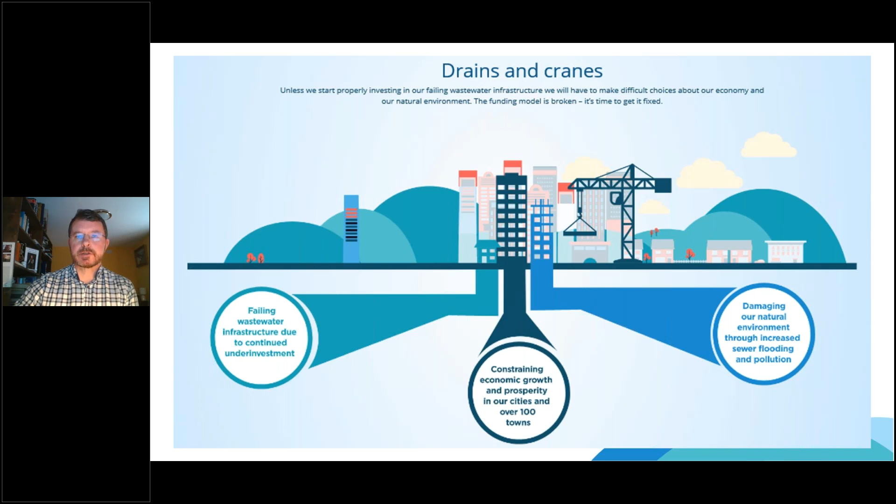So there's lots to do in Northern Ireland. Despite that, thankfully, we've continued to successfully deliver a lot of private sector levels of performance and efficiency.

I'd like to take a wee look back at our last price control period, finishing in March. We called it PC15, price control 15, and it lasted 6 years, from 2015 to 2021. We've got £990 million of constrained funding against a £1.7 billion requirement that we asked for, which was further constrained during the price control period. In other words, there were further cuts which affected the delivery of our price control targets and outputs.

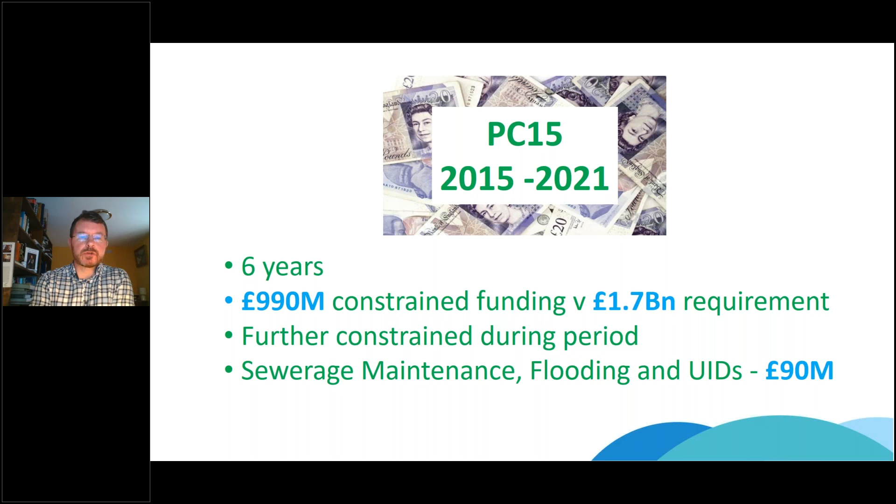In terms of sewerage maintenance, flooding and UIDs, there was £90 million allocated to that programme and project stream. Out of that there was a capital maintenance programme of £28 million, and out of that came a gravity sewers allocation of £18 million.

Within the gravity sewers allocation, we had a target of renovating or replacing 11 kilometres of sewers per year, representing about 0.07% of our network per year. We always aim to maximise trenchless solutions, mainly through the use of CIPP. On some of our programmes, we've been achieving 90% plus use of CIPP liners and trenchless solutions. We've got probably some various work streams.

We've got our planned rehabilitation, which is based on risk assessment and prioritization. Our asset management folk take all of the sewers in Northern Ireland and run them through a risk assessment model, which produces a prioritised list of sewers that we carry out further assessment on and then do the rehab on. We also have our unplanned programme, which is essentially emergency or difficult sewers.

For example, places with restrictive access, working in basements, where we've had to demolish and rebuild private garages, or places with complex engineering. A few years ago on Boxing Day, one of our major pumping mains burst under a motorway embankment, which caused a bit of an upset, and we had to go in very quickly and get that fixed.

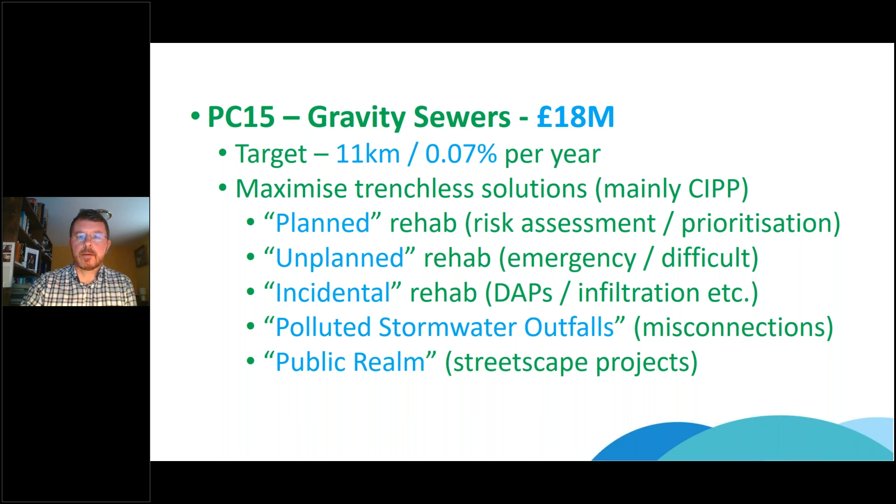Some other PC15 programmes covered wastewater pumping station-based maintenance and first-time sewage services. We've got critical infrastructure for water and wastewater, which looks at crossings under railways, major roads, etc. There's also DG5s, internal flooding, UIDs, and unsatisfactory intermittent discharges for water quality. Storm separation, we have a CSO maintenance programme, and there were some other nominated projects.

So as far as delivering the sewage projects are concerned, we don't actually do anything in-house. It's all outsourced, with various construction and consultancy frameworks. For example, during PC15, we had IF19 and IF100, which were frameworks for construction. We've recently awarded our IF105 frameworks for construction, and they'll be carrying through into PC21.

We've got our integrated supply frameworks, which are frameworks for mechanical and electrical plant and equipment and materials. There's a requirement in our procurement with our supply chain partners to go to the integrated supply partners to buy things like blowers, mechanical electrical equipment, pumps, etc. So there are pumps frameworks. Essentially, these integrated supply frameworks act like nominated suppliers or nominated subcontractors for NI Water.

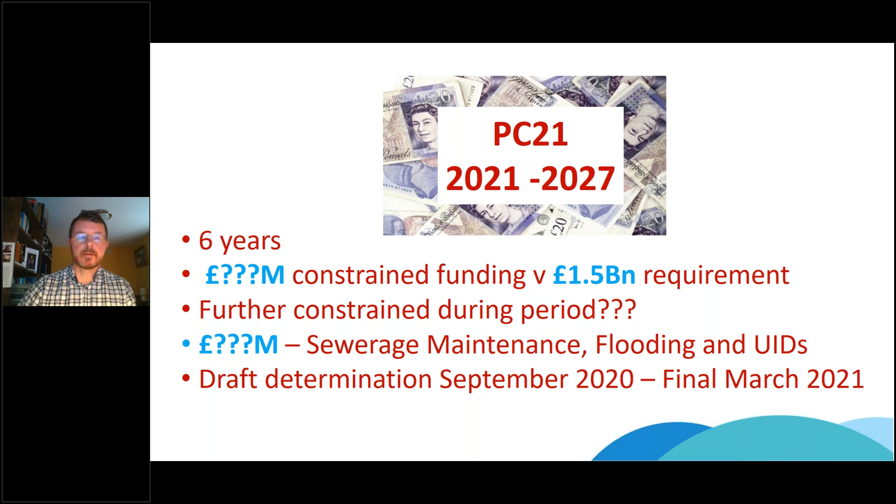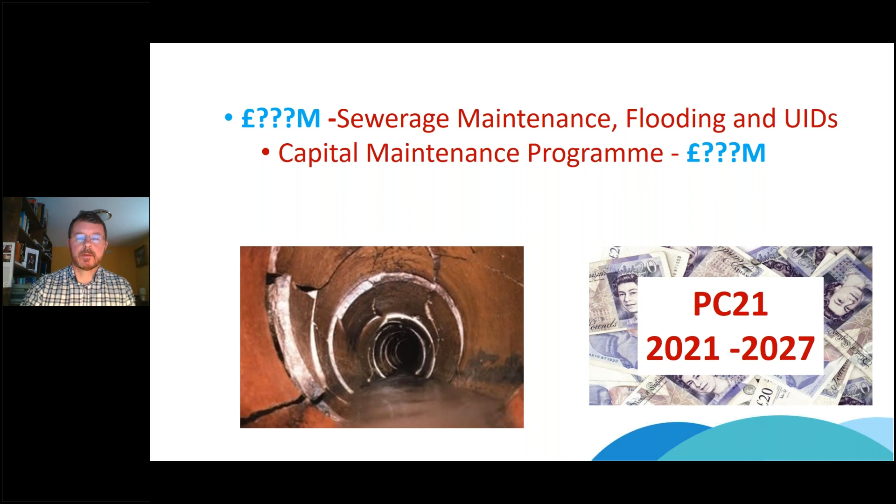As I said, we don't know how much we're getting for sewage maintenance, flooding and UIDs, and the capital maintenance programme will be X amount as well. Looking forward to what we are going to do, our targets have yet to be set, and we don't know how much of our network will be replaced per year. But again, we'll always be maximising trenchless solutions, mainly in terms of CIPP.

We have a planned rehab programme, again down to risk assessment and prioritization. We'll again have our unplanned rehab programme for emergency or difficult schemes. We'll have a stormwater separation and polluted stormwater outfalls programme dealing with foul to storm misconnections. We're also intending to have a pitch fibre programme, dealing with pitch fibre rehab and replacement.

I suppose like a lot of water and sewage companies, we have the dreaded pitch fibre in our networks, which causes all sorts of problems when it starts to go wrong. Thankfully in Northern Ireland at this stage we aren't responsible for sewage laterals the way a lot of the WASCs in the UK mainland would be. We'll also have a public realm programme for streetscape projects and surfacing, and some rising mains rehab and replacement.

So other PC21 programmes and major projects include first time services, new connections, and wastewater pumping stations base maintenance. We're also going to have a programme of critical infrastructure for crossings onto railways and major roads, etc. That critical infrastructure work will mainly be appraisal at this stage, aiming to identify critical crossings, assess their condition, and prioritise all those different needs and interventions.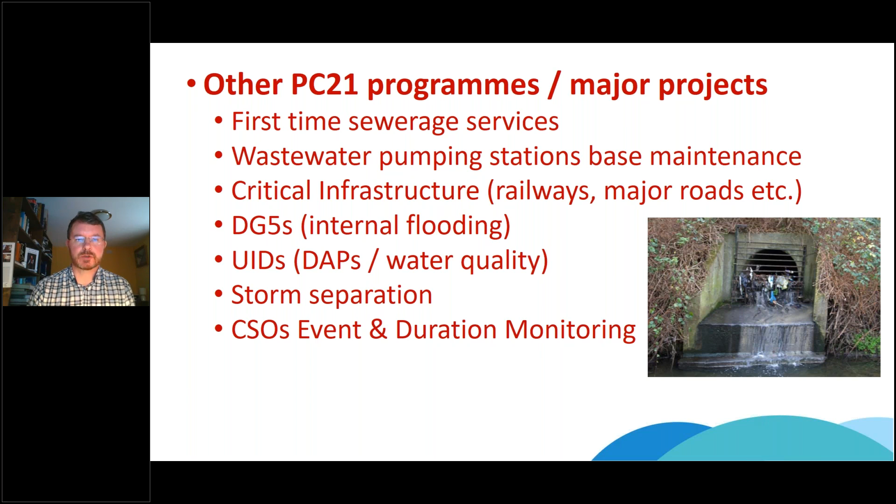And we also have our CSOs and event duration monitoring programme, which is really prioritizing CSOs within the 2 kilometre zone of shellfish and bathing waters, essentially to monitor discharges within those areas.

Another one in the offing is the Strathfoyle Syphons project, about 0.5 kilometres of twin siphon pipes below the River Foyle up in Londonderry. The existing siphons are steel pipes, and the drivers for the project are operational resilience, and also we're looking at future capacity needs for those whenever we go to replace them.

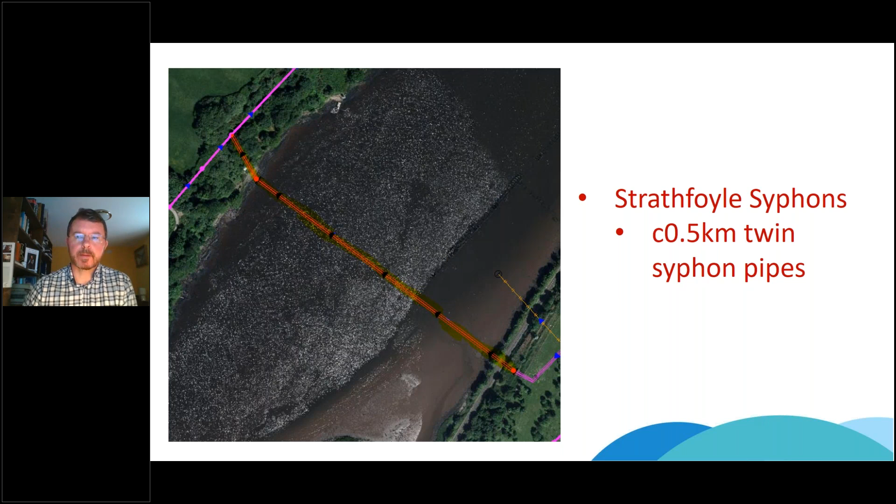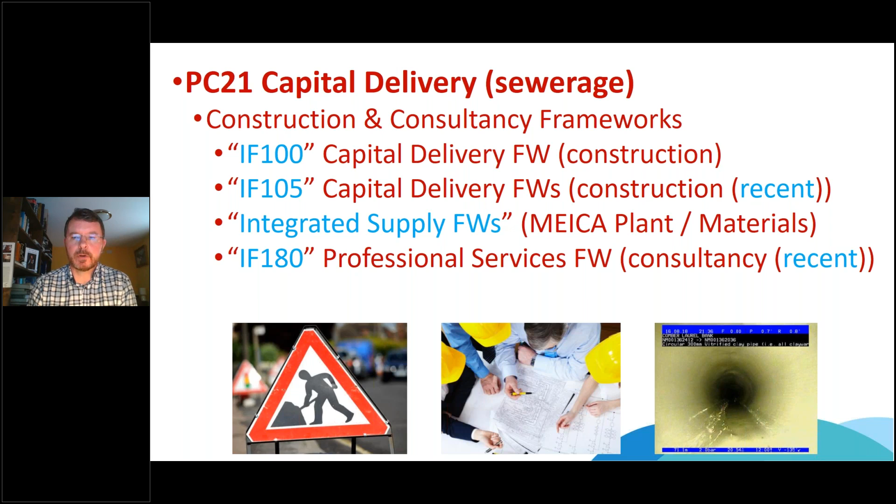Okay, just looking here at capital delivery for sewerage. Going forward, it'll all be outsourced. We have our IF 100 capital delivery framework, which will continue. We also have our IF 105 capital delivery frameworks, which are our most recent construction frameworks. IF 105 is divided up into 3 lots. Lot 1 is for infrastructure up to projects of about £1 million in value maximum. Lot 2 is for non-infrastructure projects and programs up to £1 million maximum value, and lot 3 is for infrastructure and non-infrastructure up to £10 million maximum.

For projects over that value, at this stage with our transition from the European Union, we would essentially maybe have to go to OJEU competition for those. We're also considering maybe a framework for those larger projects as well, but that's still in very early stages.

Again, all of those lots within 105 are design and build, or they can be direct design and then followed by construction. The integrated supply frameworks will continue for our MEICA plant materials, and then we will continue with our IF 180 professional services framework, recently awarded, which will continue until such times as that runs out, and then it'll probably be replaced. Again, our PC21 ops repairs and maintenance will continue with the term contract for cleaning and maintenance, which includes our CCTV, cleaning, CIPP lining and repairs.

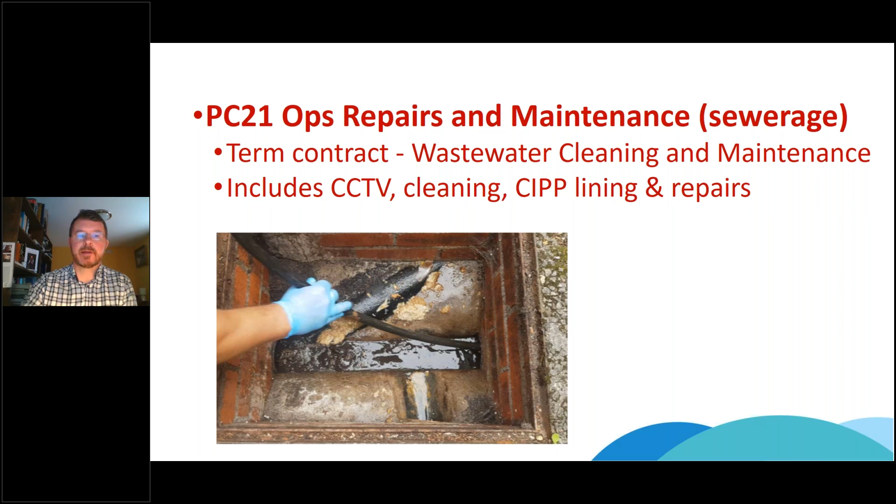So what's new and on its way in innovation? Sort of like a lot of water companies, we're on this journey of continuous improvement. One of the things we introduced during PC15, our last price control period, was an in-house modelling capability, which has paid us huge dividends in getting better information, so we can go forward with evidence-based decisions regarding our future investments.

We have updated our capital works procedures. Essentially we've got procedures now which create the plans, deliver the plans, and then monitor the plans. We're divided up into two. The Asset Delivery Directorate, the directorate that I work in, is divided into two main sections. We have our asset management section and we have our integrated capital delivery section, and I work in the delivery section.

Going forward, there's going to be more of a focus on value management. Essentially that means for us an earlier focus on challenging the need for capital expenditure. It includes things like more root cause analysis and triaging the needs and benefits. It'll be more evidence-based, and it'll decide whether a capital project is actually needed or whether increased maintenance is needed - in other words, it's thrown back to ops - or whether it could be a combination of both.

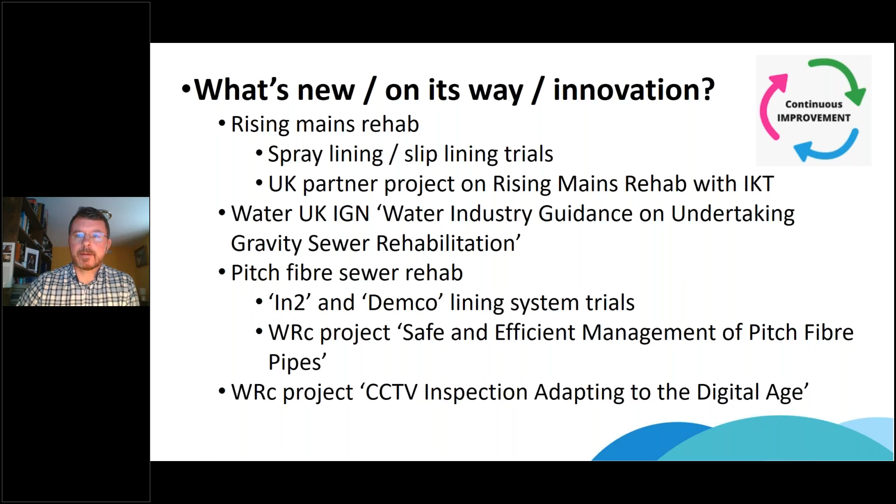Right, I've got a question for you, with reference to the 1.5 billion funding requirement. Where does that 1.5 billion come from? That 1.5 billion will be a combination of our public subsidy from the government, and it'll come from revenue that we generate ourselves through water charges.

So who's decided that that is the amount of money that you need? Well, we have had a PC21 program team who have pulled together the bid, and they have taken a look at all the various needs. The PC21 team has basically established, put that 1.5 billion through various business cases and various assessments of networks, and there's been various funding models and things put forward for that.

We've been using things like IPAC to cost up the needs. So it's essentially a business plan based on what the current situation is, what the future needs are, and how much it's going to cost us.

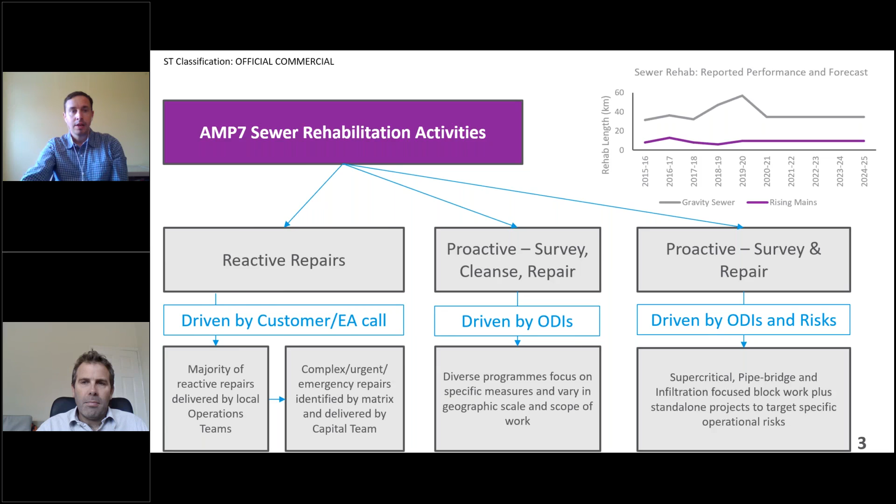As I mentioned on the previous slide, reactive repairs still account for the majority of the rehab expenditure and the rehab length that we deliver. But of course, there are many reasons for us to aim to reduce the number of repairs that we perform reactively. First, if we're responding reactively, then our assets have failed and sewage is likely to have escaped, impacting our customers and environment, and likely leading to clear-up costs, not to mention potential fines or ODI penalties. So if we can move to a more proactive system of asset management, we'll reduce the number of failures and repairs, have better control of our assets, and a better understanding of our overall asset health.

I'm sure our aim is similar to many other companies in that we want to continue along that pathway to becoming more proactive as we journey through AMP7.

Okay, so this slide gives a high-level overview of one of the key approaches towards becoming more proactive on sewer rehab. Over the past couple of AMPs, we've developed what we call our Proactive Works programme, and this has been really instrumental to us delivering improved sewer flooding performance over recent years. In AMP6, we more than halved the number of sewer flooding incidents that customers in our area had experienced.

The general approach we've got is to use historic ODI performance to guide where we conduct CCTV surveys and then perform cleanses and repairs off the back of the survey findings that we have. The rationale for this approach is that if we can do it at a sufficient level, then it will reduce the number of reactive jobs that we have. So that was the initial idea for the programme in its infancy.

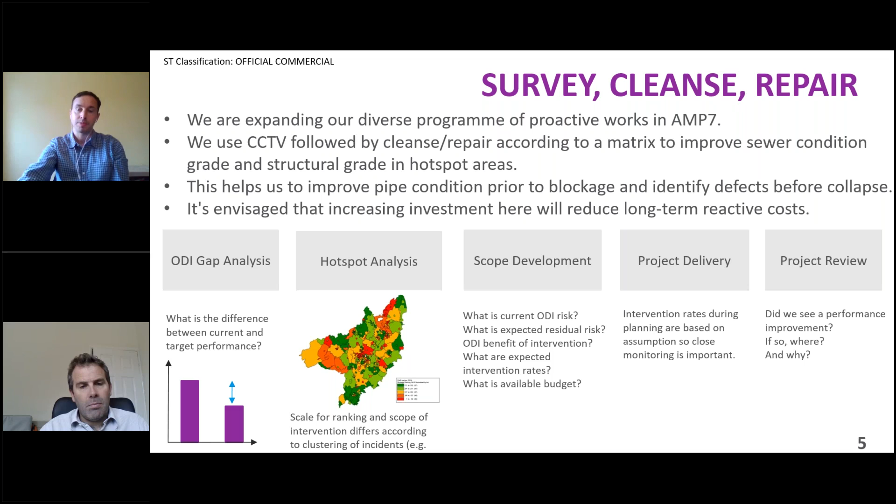We run these programmes on an annual basis so that we can flex them to meet performance needs that have arisen in the previous year. We also monitor them very closely throughout the year in terms of their delivery, and then review them extensively at the end of the year to ensure that we can work out why particular variants of the approach have worked best in certain situations, and then we can incorporate those learnings into future years' programmes, and that will be key to the development of this process through AMP7.

First, we have what we call our supercritical asset work stream, which has the objective of ensuring that we don't have a collapse on any of our most critical sewers. These are our 0.1% top ranking sewers in terms of their weighted consequence. We have a model which weights various aspects of consequence and enables us to rank every pipe in our network, and these tend to be very large sewers running through urban areas.

So they tend to be old and difficult to access. If we were to have a collapse in one of these sewers, then it would likely lead to flooding of thousands of properties, have a really detrimental impact on lots of businesses, and probably cause a very severe pollution incident. We've estimated that the cost of one of these collapses to us in terms of clear up costs, repairs and fines would likely exceed £100 million. So we obviously need to ensure that we don't have any of these type of incidents.

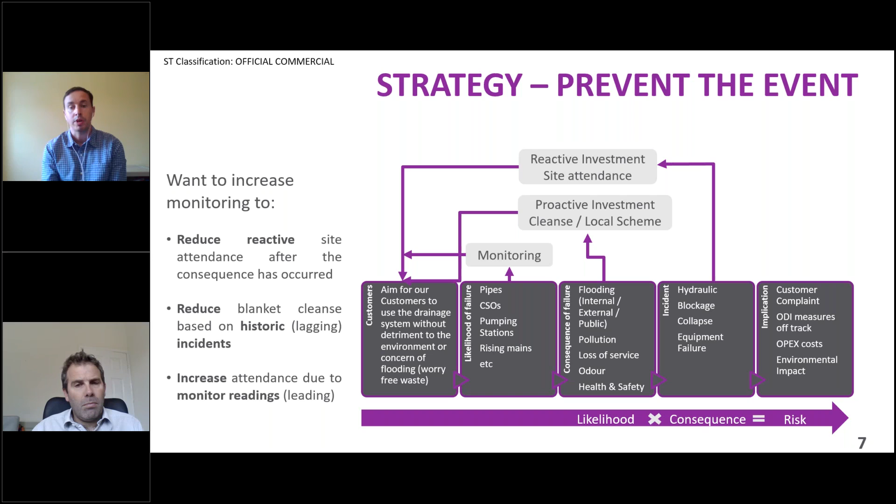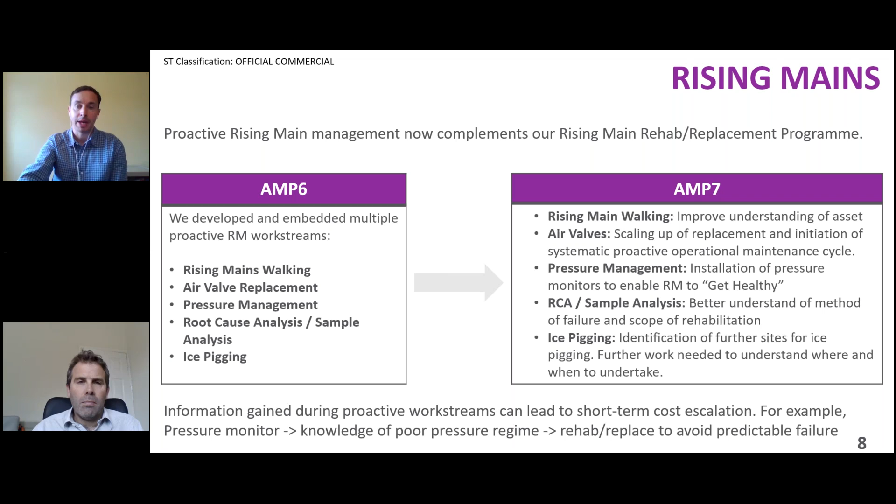Okay, so the final few slides covered some of the challenges we've identified in relation to sewer rehab in AMP7, and it'd be really great to discuss the experiences other people have had on these issues, either in the questions after the slides, or feel free to contact Andy or myself or any other Severn Trent colleague that works on rehab afterwards, and we'll be very happy to discuss any of these things with you.

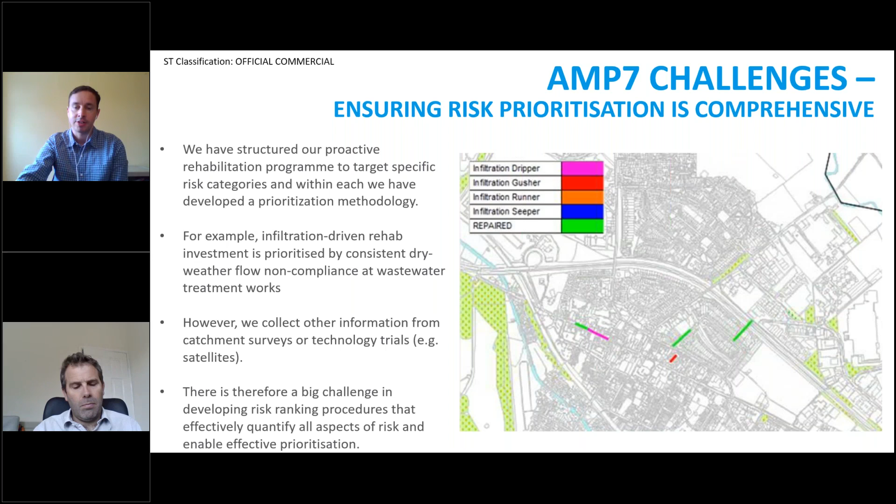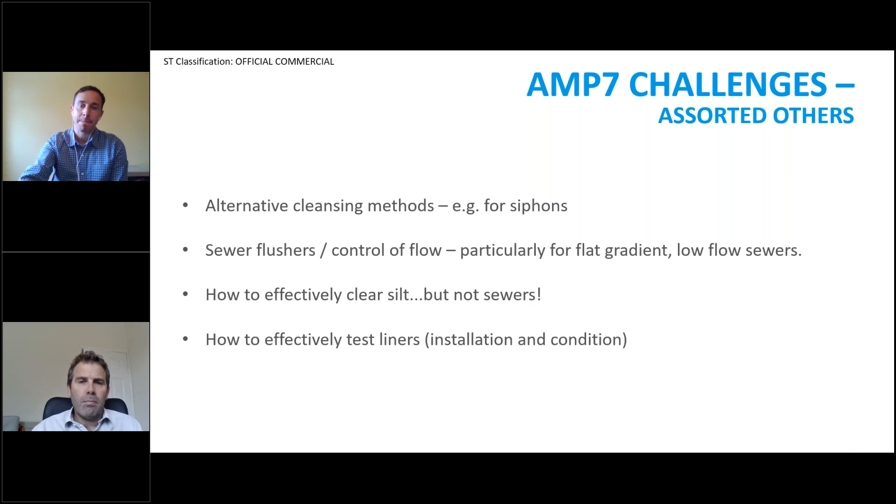So those are the areas we thought we'd discuss with you today. Thanks again to Ian and the organisers for giving us the time to talk to you, and we'll be more than happy to answer questions to the best of our knowledge.

Thanks very much. I've got a slightly long one here, and it concerns COVID-19 — let's see if you guys are able to answer it. Severn Trent Water will no doubt be aware of increasing concerns raised recently regarding cross-contamination of COVID-19 and other infectious diseases, which currently at least present a lower risk in terms of fatality or serious long-term consequences, but still carry risk of transmission of these microorganisms.

Bear with me one second — I've moved too far down the screen trying to read it out. Apologies, everybody, I've just got to get the screen back.

The risk of transmission of these microorganisms has been recognized and verified for some time, but only recently has focus turned to operations undertaken daily by those doing essential work for the UK water industry — things like water jetting, small jetting systems within confined spaces, or larger recycling jetting machines that expel plumes of potentially contaminated water vapor into the atmosphere. The contamination is far from just an airborne risk; residual contamination can remain infectious for hours, maybe days, on hard non-absorbent surfaces. While the demand remains for removing blockages and alleviating sedimentation to avoid flooding or river and water contamination from unnecessary CSO discharges, the need for alternative solutions is now greater than ever. I'd like to ask what efforts are being made to proactively evaluate remedial solutions that perform these tasks remotely, without the risks referred to above, for safe working below ground in a contaminated drainage system. Are you able to comment on that?